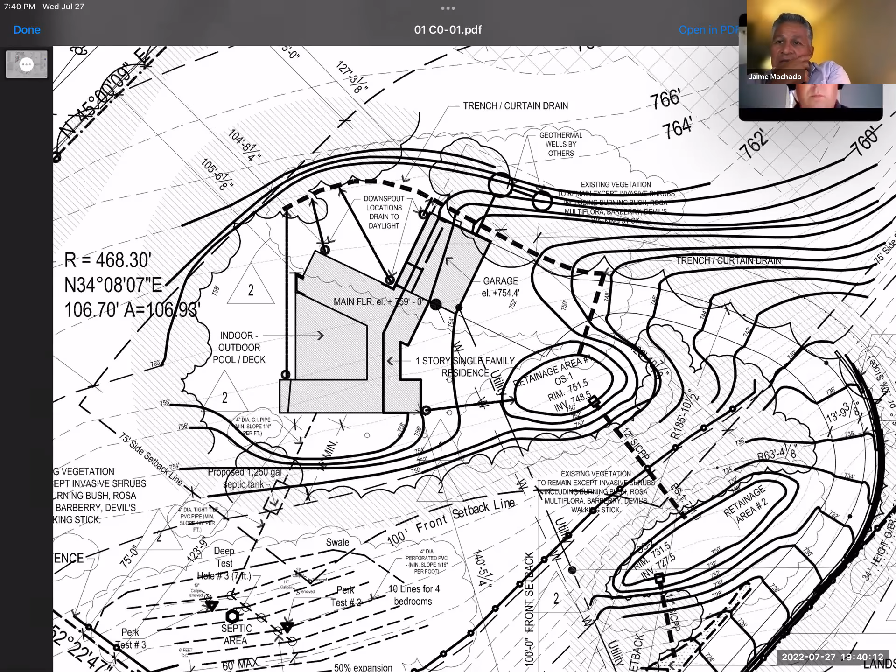As you remember, I had to choose 3 retainage areas, and then we got the engineer involved, and he revised certain things, exactly as you're seeing right now. Starting from the top, he indicated where the rain gutters would drain to daylight.

If you remember the first time, I had a cheese doodle retaining area, connected by a pipe, which was also a trench drain slash curtain drain, which went to a secondary retainage area underneath the driveway. From there, any overflow would go down to the lower area where the driveway would bend.

So looking at that, he revised it and said we'll create the trench drain and wrap it around the northern part of the house. If you notice the little circles on the corners of the building, that's the assumed location for the downspouts of the gutters. Underground, they would run to daylight to the trench, so that would collect everything on the upper part.

On the west side of the northernmost portion of the grass area, which is actually west of the building location, we decided not to do anything. That would naturally just go back into the ground.

So just sticking to the north, it would travel down to the easternmost part, closer to where the garage is. From there, it would take a 90-degree turn and go into what we're calling now retainage area 1. As you notice, there's some information on the elevation for the rim, the intake, and the invert for that area.

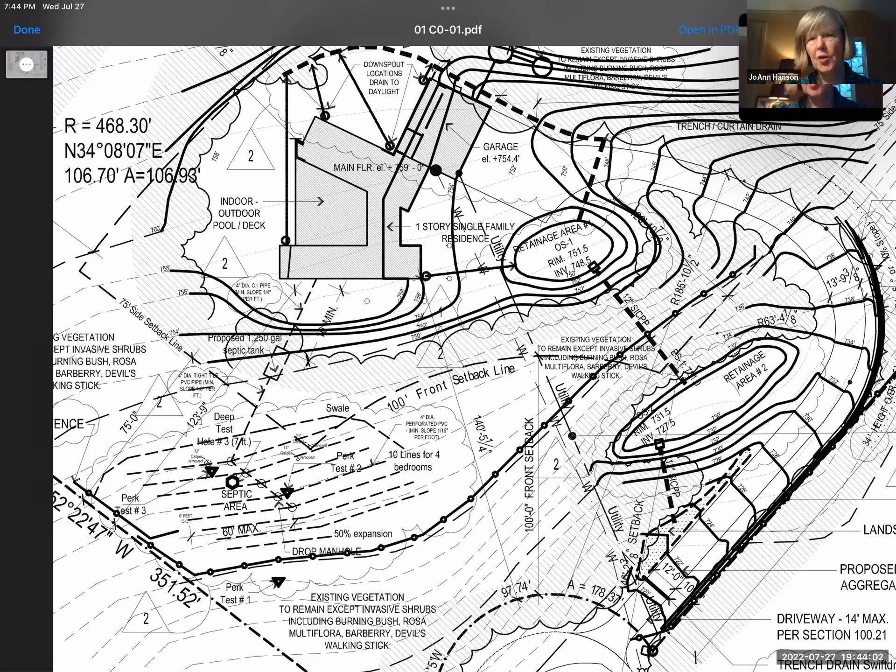So I'm sorry, I'm going to interrupt for a second. So the house is just a 1-story house now, is the intent? Yes, it's always been a 1-story house.

I just didn't coordinate that with the other drawing by the engineer. I guess I was concentrating more on the site design and not reflecting the information throughout all our sheets to make sure that it's consistent.

Wait a minute, I would time out a second if I may, because in our last meeting there was definitely discussion of stairs up to a second floor that was mostly going to be used as a residence for Mr. Perna's son.

Right, so how do stairs and only one story not add up together? Right. It doesn't matter, but let's make sure that whatever we're seeing is representing what you're planning.

That's my fault, actually. I forgot about the upstairs - I thought it was like a 1.5 story, 1 story building with a roof, but I forgot about the upstairs area. So that's my fault, I'll change that back to 2 stories and reflect that.

One of the past comments was to change the 11% grade of the driveway into 10%, which is reflected here.

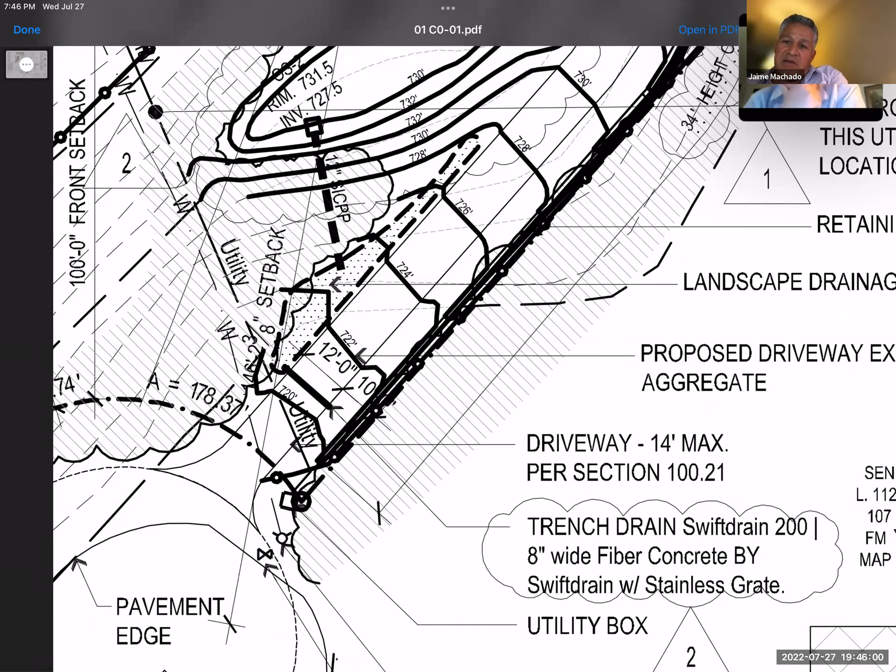Other comments were about what do we do with the beginning of the driveway - as you can see, we have a landscape swale. There were also comments about identifying the trench drain and where it goes. It's just connected directly to that landscape drainage swale, and also a request for detail and information, which is shown in the bubble here.

And also to summarize, we added some information. Could you pop back to that detail of the swale, please, for a second, and just pause there for a moment?

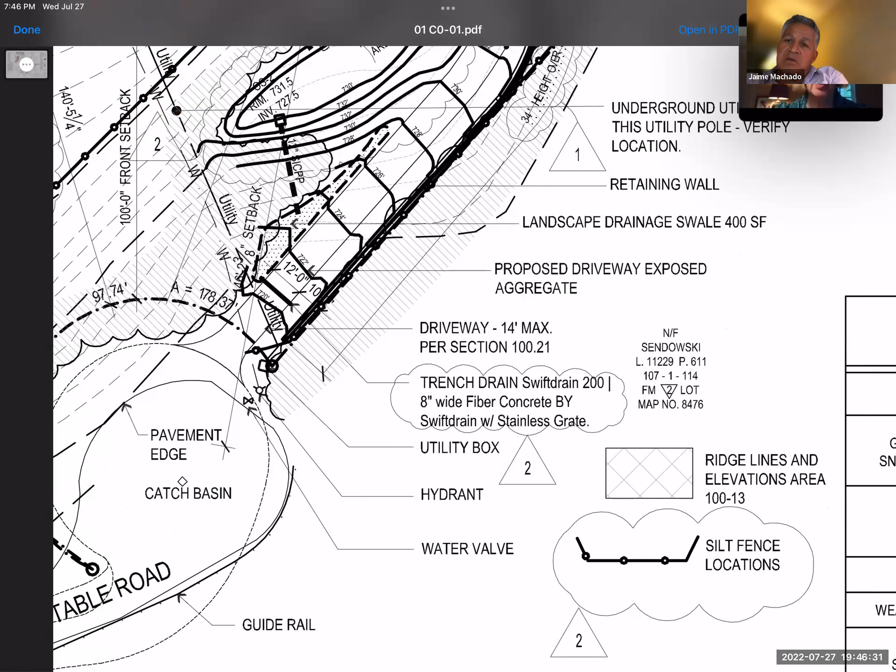So it will be this area right here, which is highlighted in a dark dash area, kind of elliptical. Is it intended to be just a terrain depression that's going to hold water at high density periods, or is there any kind of holding tank involved in it? There is no holding tank.

Most likely, all these retainage areas will not be in use. This is only for an extreme condition, if it rains for 2 weeks straight, which is unlikely. And if anything, the whole site basically has a decent drainage capacity, so it never overflows - it kind of soaks into the ground.

I understand that there's a lot of bedrock here, but there's a difference between having bedrock and cracked bedrock, where water could seep through the cracks underneath the bedrock situation. According to the PERC test, this site does not hold water whatsoever. So the retainage area is better described in the report from the engineer, so we could talk about that if the engineer is on board at the moment.

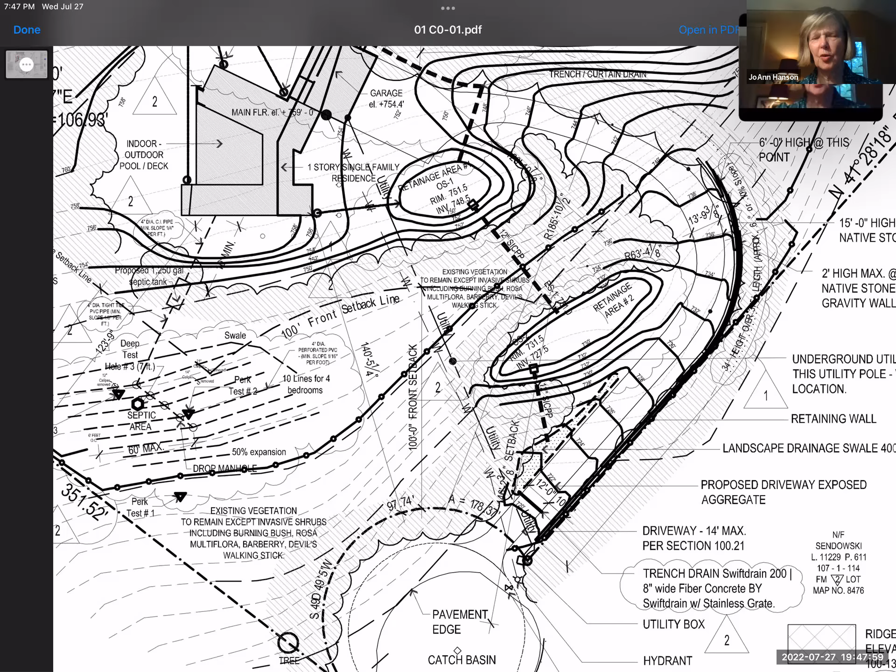And can you just address, because there's a lot of steep slope behind the hill that's coming down into the house - I'm not sure I entirely understood if you were trying to route that water around the house back out to the front to these drainage areas. Okay. I live at the bottom of a hill, so I'm very familiar with how much water can come down those hills.

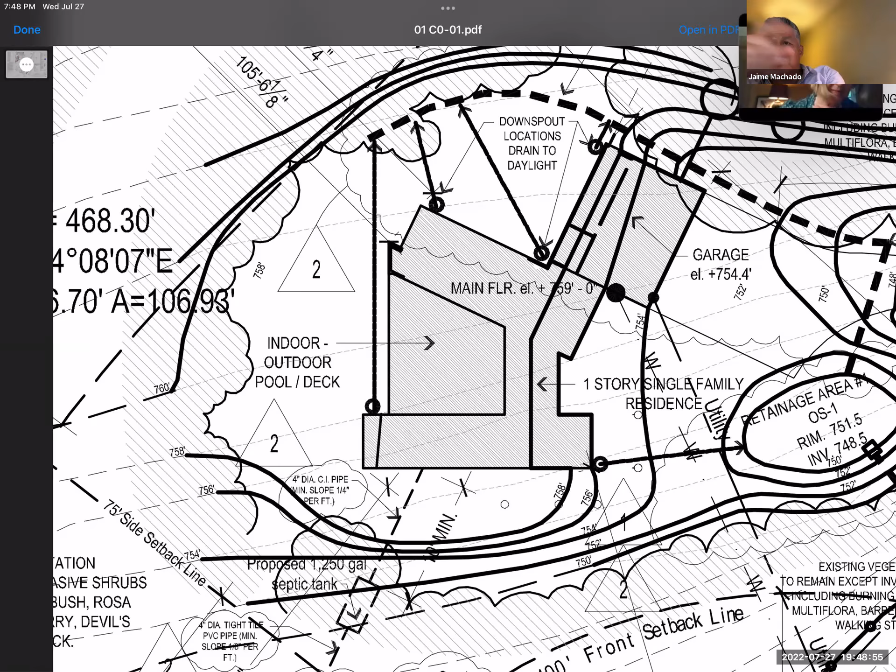If you look at the surrounding area of the building itself, it's at a certain elevation. From that, the surrounding grass area, which is being proposed, will slope away from the house in all directions. So anything coming from above the hill would be caught and directed toward the trench drains, which is the heavier dash area that you see here. This would collect everything and prevent water from even reaching the house.

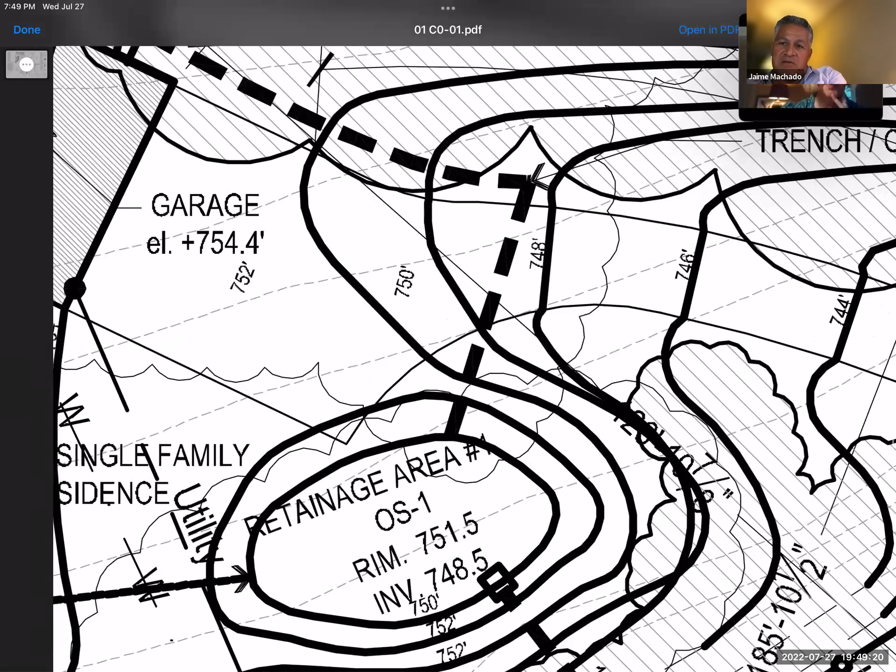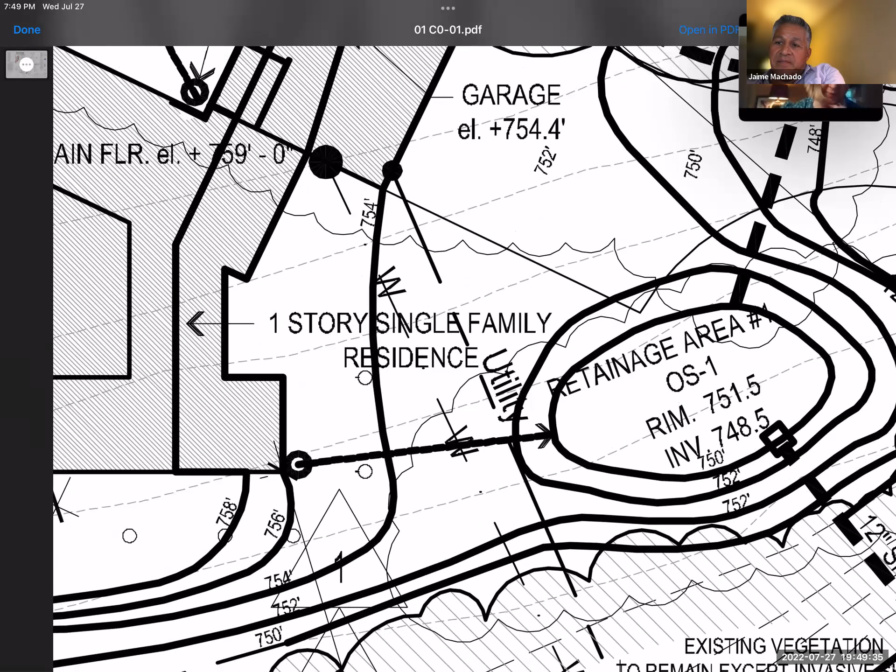From there it would go down toward the driveway, and then where you can see the trench drain indication, it turns 90 degrees and that will go into retainage area 1. On the west side of retainage area 1, all the water would naturally just go toward that area because that's the lowest point. But you can see the elevation of what we're trying to do.

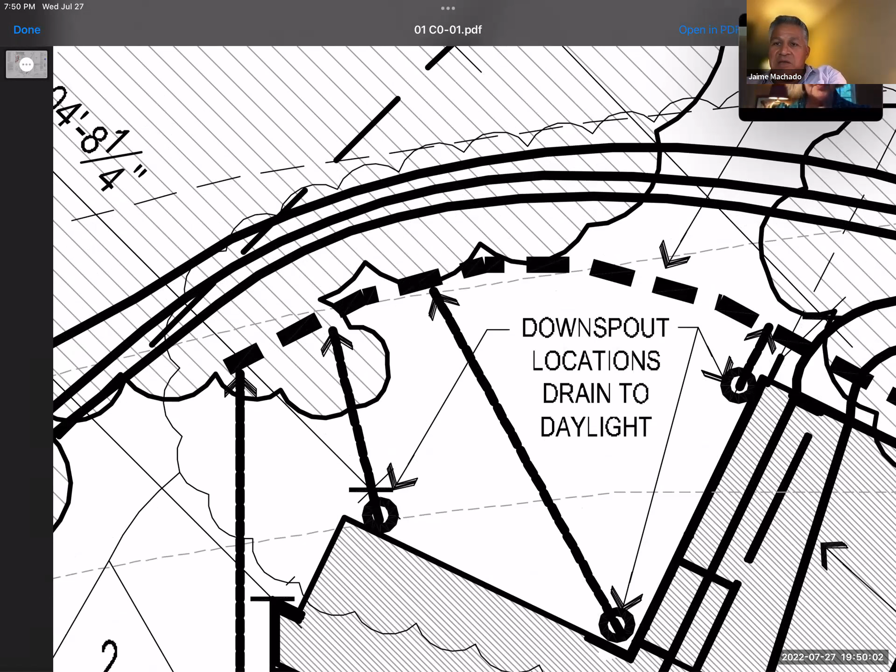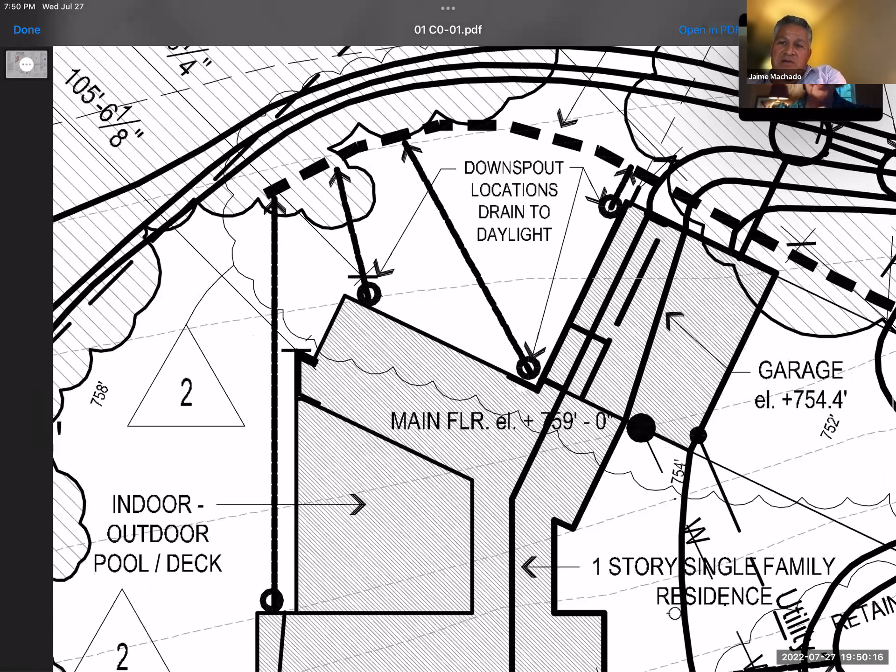So the water would naturally go away from the building toward area 1, which also collects water from a higher location - if you look at this area right here, the water would not go past the dash line from the upper portion of the site. The arrows you see below the dash line show water going toward the trench drain as well, and away from the main building. So this building is never going to see any type of water or ponding at all.

And the depth of that - you're saying trench, not French? The depth of the trench drain is... what?

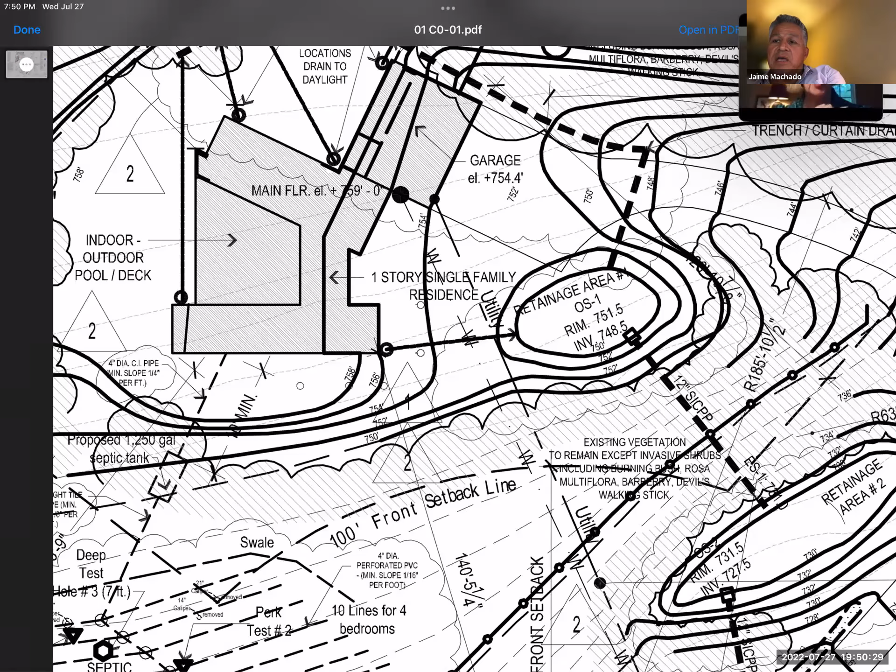I have a detail on A004. Let's see if I could find that. You could bear with me a second.

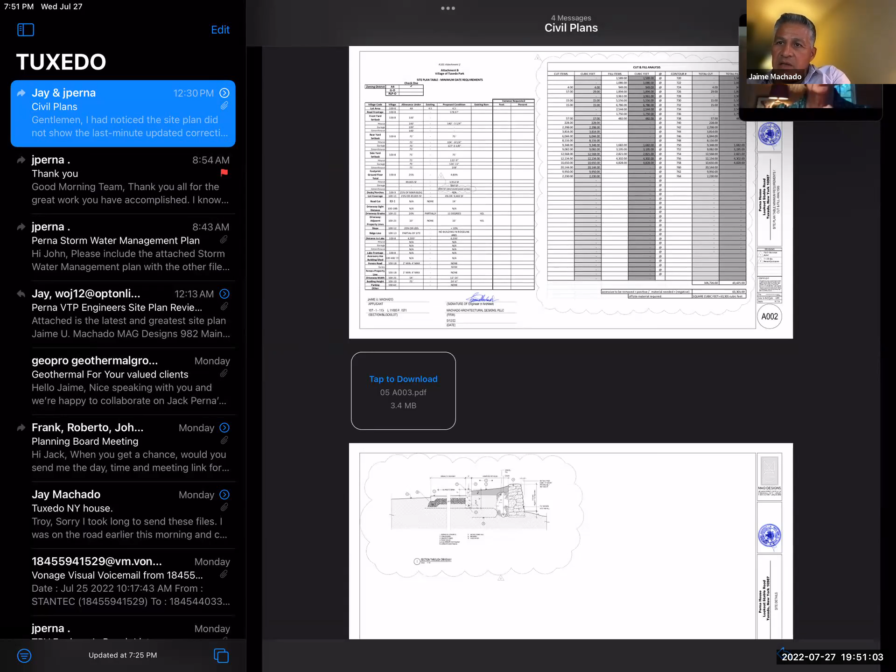Maybe I don't have the detail, but it's typically 2 to 2.5 feet deep, filled with clean stone and probably an 8-inch perforated pipe. We'd probably make it pretty substantial, maybe 1.5 feet wide, with the stone carrying all the way up to the surface, so it can capture surface runoff from the upgradient areas.

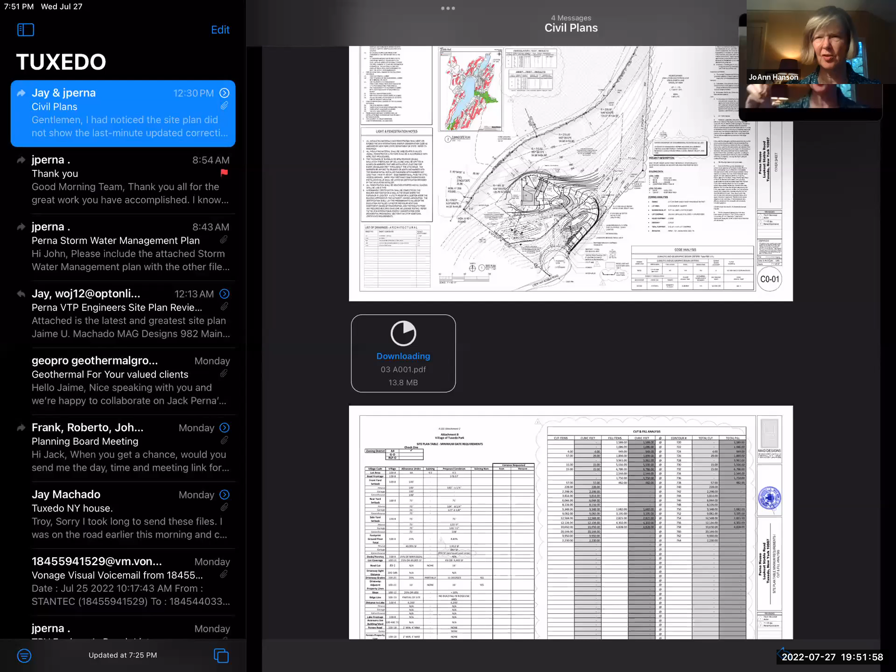Yeah, I mean, we're now, if you saw the cars floating away on Route 4, we're getting really significant rainstorms that create a lot of short-term intensity. Hopefully we won't have long-term storms of the same. So I'd just point that out. Jay could comment on it further, but as I say, I live at the bottom of a hill and I've got a variety of things breaking the flow coming down.

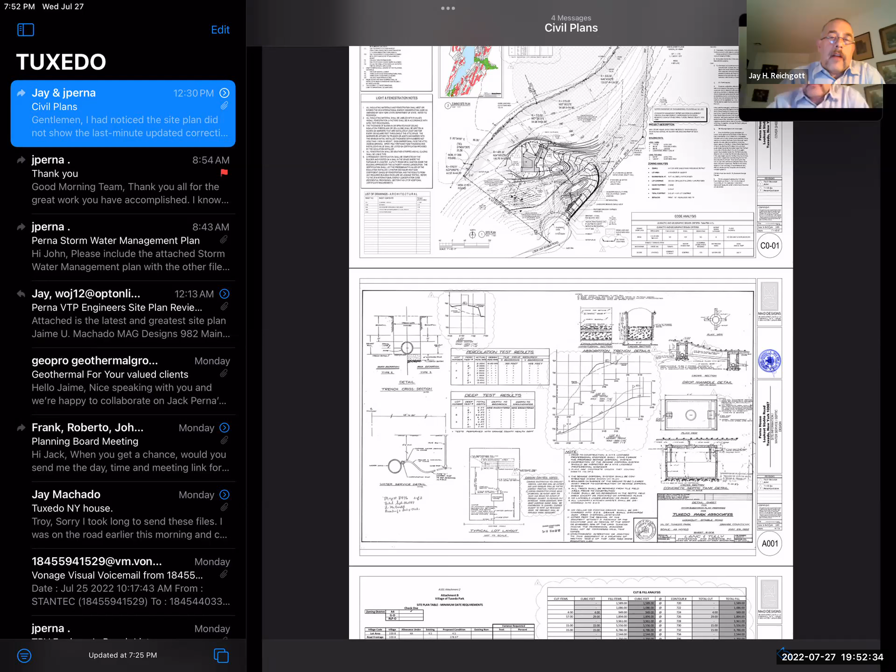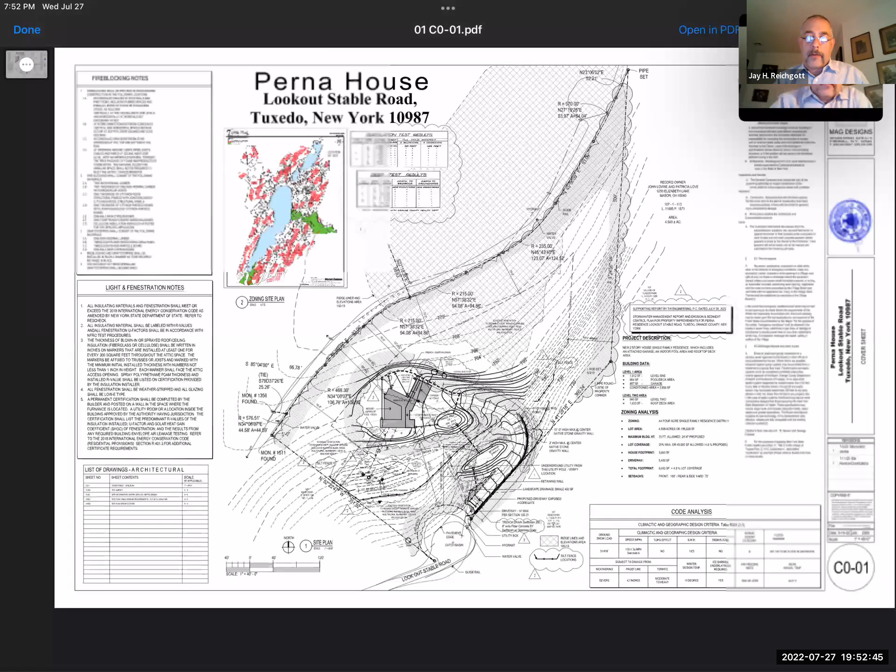Well, I think there were a number of comments raised both at the last meeting and in Joe's initial response to the submitted plans, and it looks like a lot of those have been addressed. Now, I know I got these updated drawings after lunch today, and I got the engineer's report after lunch today. I've looked at it and it's updated drawings and an engineer's report, but I haven't had a chance to review it. I don't know if Joe has.

I think we need to make sure that those comments have properly been addressed, and we can see if the engineer's report properly supports it, and then we'll know. This doesn't have to be based on feelings, we have numbers. I know I'm tossing experience into the mix, but obviously number 8 on the list is we need the stormwater pre and post construction runoff analysis that'll say, okay, this is how this system is intended to work. And I believe that's in the report we received today.

This meeting today, we didn't have all the information as Jay is pointing out, so we're having a preliminary meeting and orientation. We need that, and our engineer needs the time to do the full analysis for our next meeting. No, that's correct, I'm just summarizing the changes. I realize we just uploaded this information. We had some timing issues trying to get people involved to do the calculations, and being the summer, a lot of people are not available, so we got lucky.

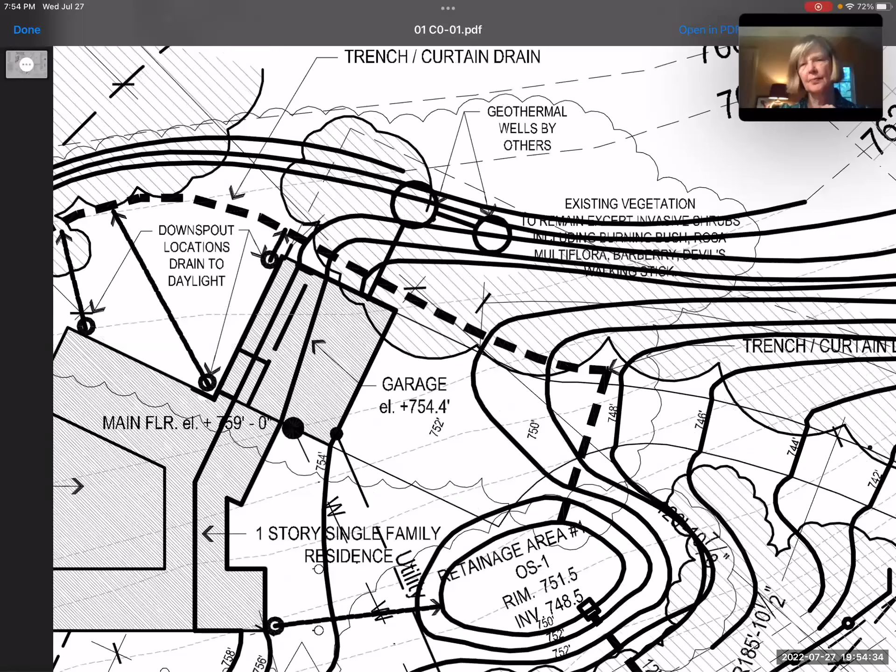As far as the site is concerned, there was a question about the geothermal, that you guys wish to have that on the plan and its location. The gentleman involved with that explained to me how this works, and I don't know if Jack wants to talk about it, but generally what I want to show is the location of it, and this is not defined as of yet. This is just a suggestion of the location, but the common limitation we have is the system has to be about 15 feet away from the building.

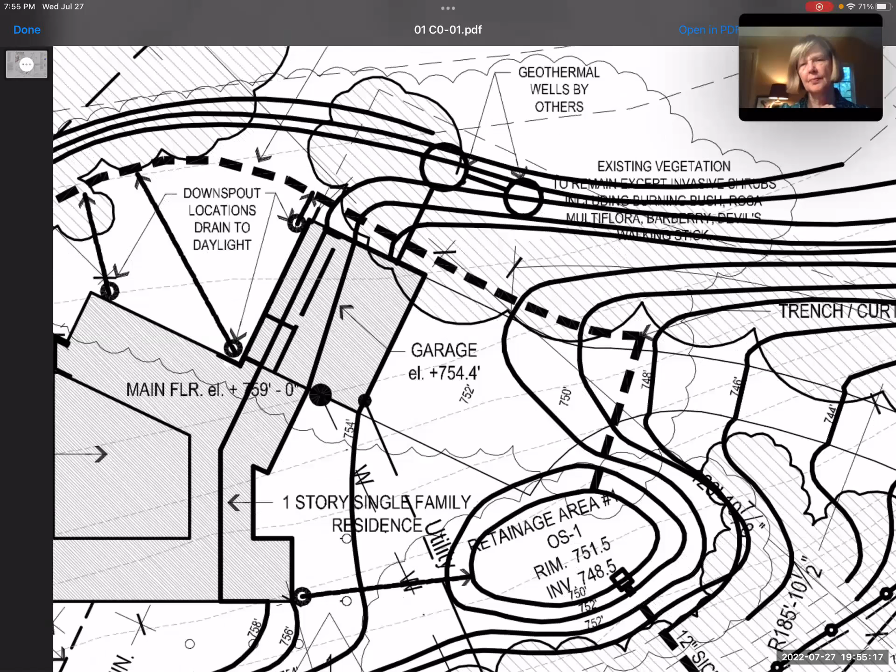And there are 7 wells. Each circle you see, the one to the left, which is slightly larger, has 4 equidistant wells within that circle. It's kind of hard to tell, but they're indicated as dots, you can barely see them. You can see the 4 dots there. And then the circle on the right is slightly smaller with 3 wells. The distance between these 2 circles is about 15 feet.

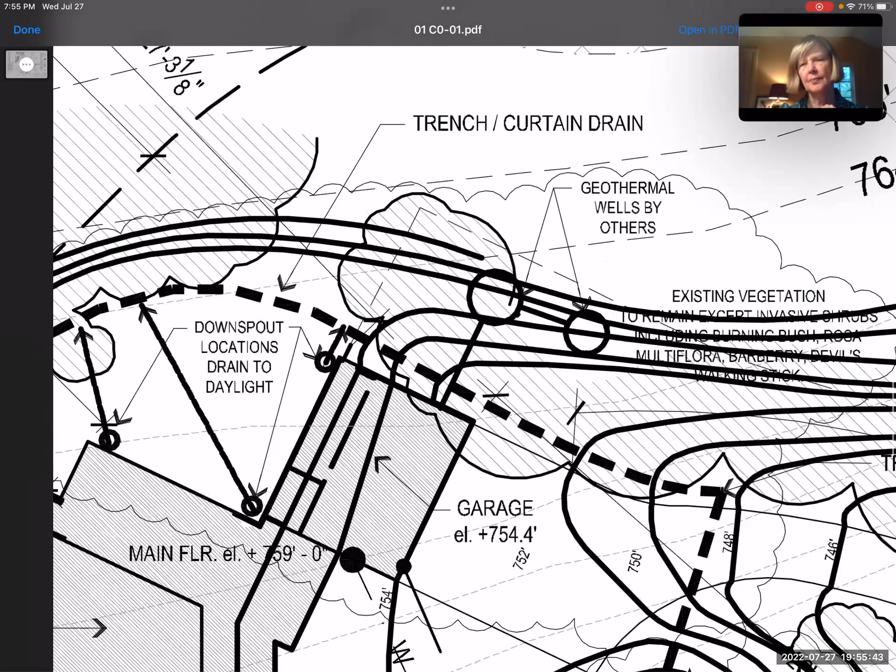So these are the parameters, whether that's going to be the true location, or if it's going to move to the west or more to the east of the building, we don't know. It all depends on what we find at the site. But this is just a suggestion of where this might go.

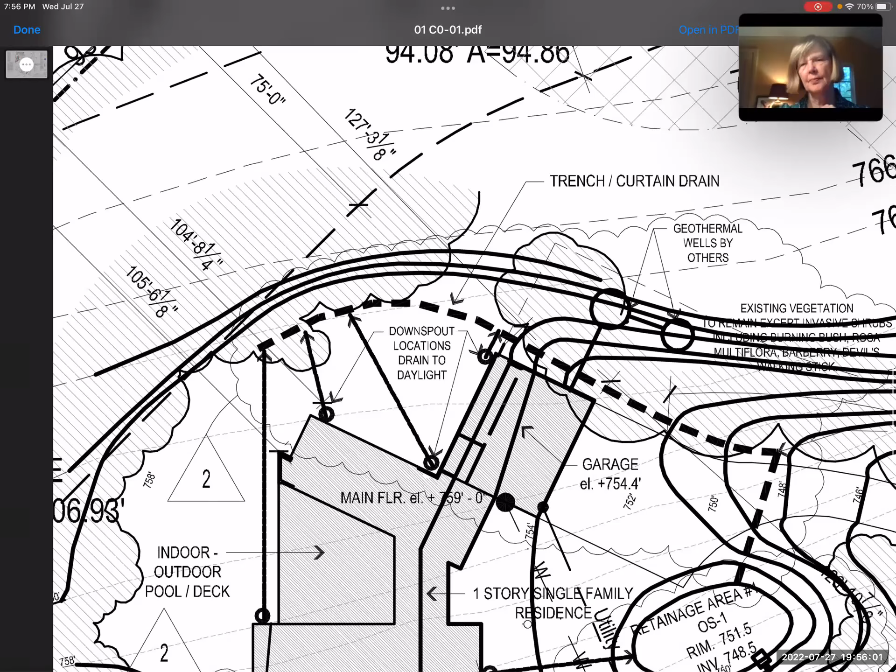Other items, if you guys would ask the question, there's a couple of things we did throughout. Again, I apologize for indicating the 1-story, it did say 2-story, I don't know what came into my mind, I think it was just late and I wasn't thinking. But there is a 2nd-story area for this building, but most of this is a 1-story space. For example, the living room is a 2-story space, so that's where I mistook it as a 1-story when it's truly a 2-story.

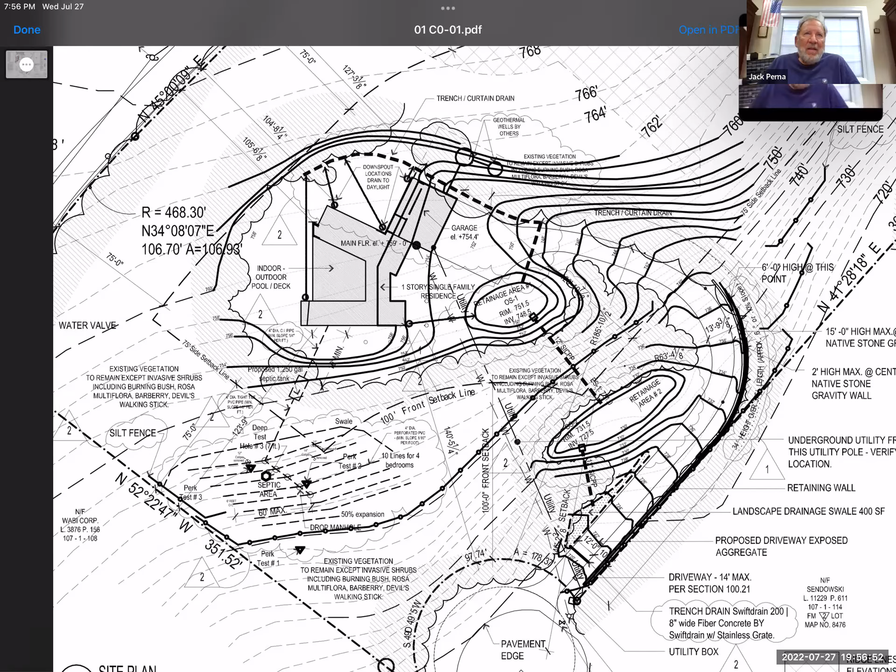But most of the spaces are a 2-story single space. Let me just point out the wing where the bedrooms are, that's a 2-story structure, and the entranceway is 2 stories. Then where the living room, dining room, and kitchen area is, that's 1 story, and the garage is 1 story. So the only structures that are 2 stories are the entryway and the 2nd floor where the bedrooms are, floors, bedrooms 3 and 4.

Conveniently, the purview of this board has more to do with footprint. So long as you're under the maximum height limit, we don't have to send you to variances. I think we're under 70 feet. That would be quite a ceiling to be putting in that second floor. Exactly.

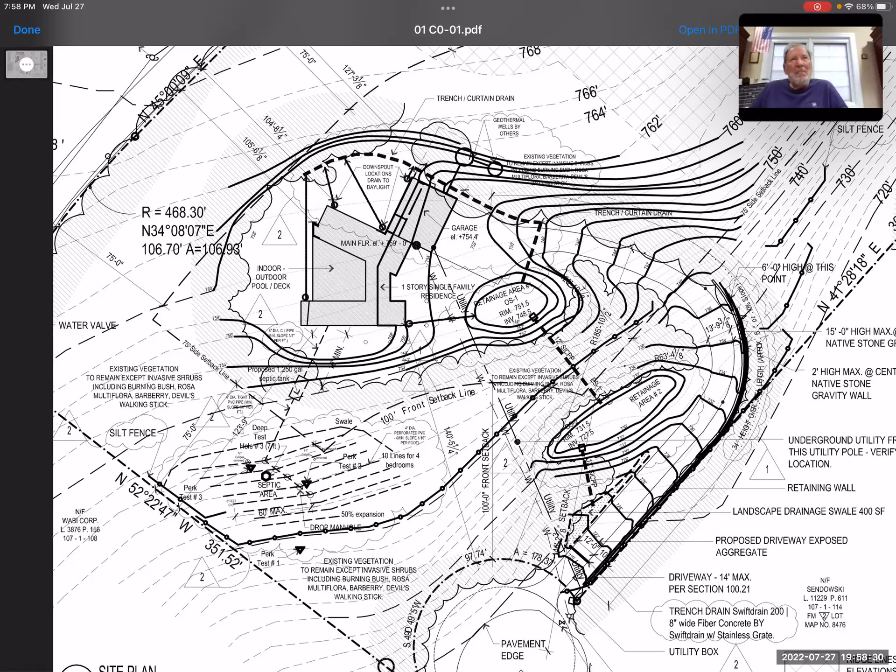Good evening, this is John. I have just two points of concern. We need to have a little dialogue with the planning board. We need to establish the maximum buildable envelope, Mr. Perna. That envelope typically is designated clearly on the site plan, just outside the area that you wish to build on, and should be noted in your legend as the maximum buildable envelope. We still don't have that. I understand there was some miscommunication early on. You thought the maximum buildable envelope was actually the building area, but the buildable envelope is really just beyond the intended area where you wish to build the house. So that's something that needs to be put on the plans. I don't know if the planning board members have any questions regarding that.

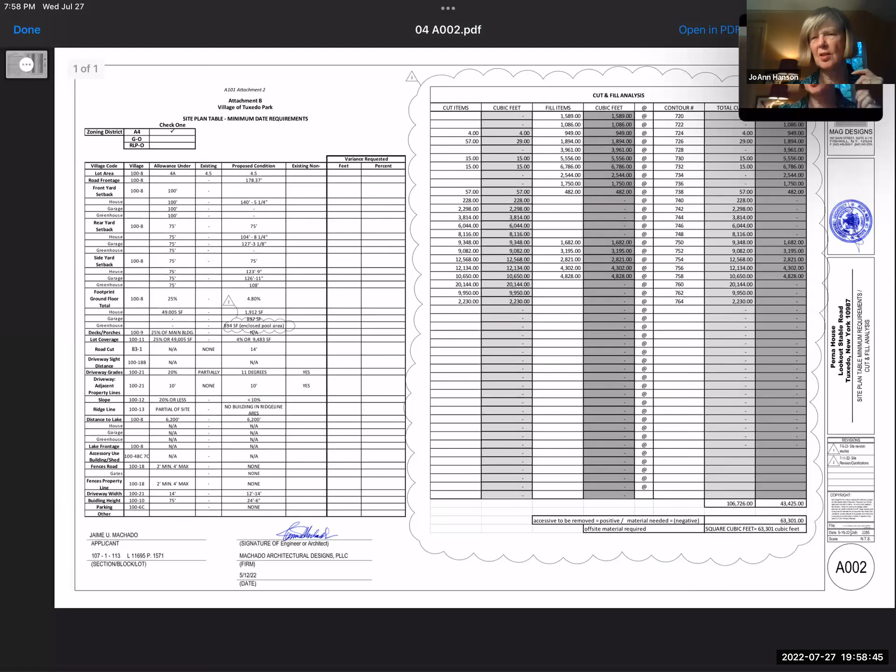No, and it obviously includes the areas of disturbance, so it's the septic system and the final location of where the geothermal is going to go. I don't know where you are on the timing of doing that analytical work with the provider.

The other question I had, Mr. Perna, is I know utility systems are being made smaller and smaller, but absent any basement, where are the utilities going for the geothermal wells, the pumps, et cetera?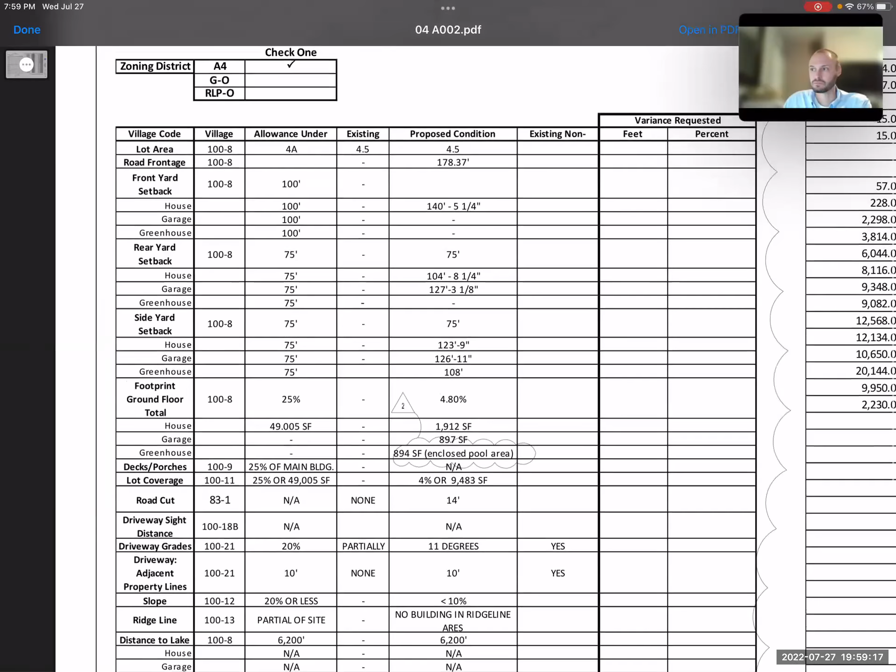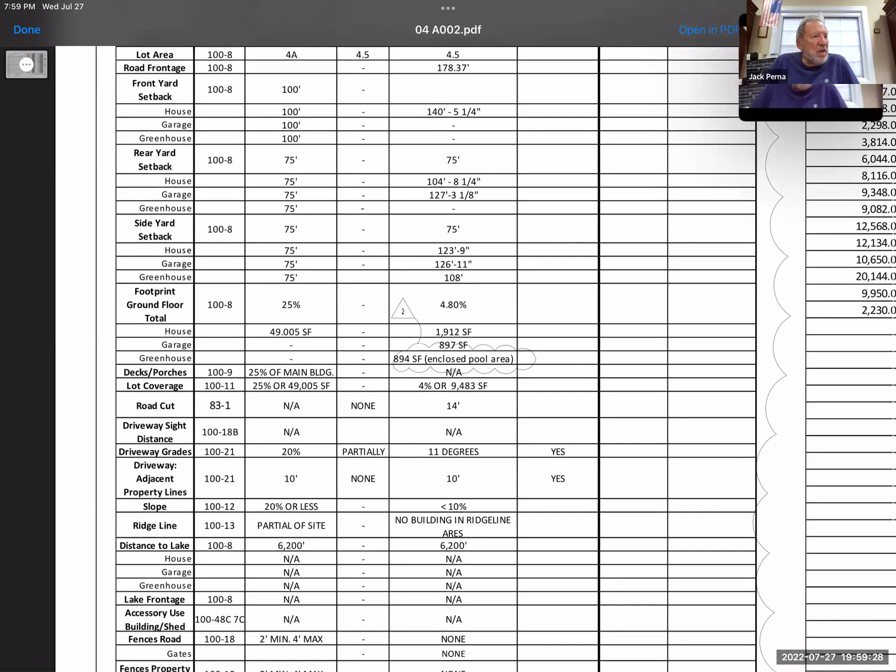The unit itself, the Hydron module that will be providing all the heating and air conditioning for the building, is about the size of a desk, maybe about 5 feet high. That will be located in the utility room in the rear of the garage, in a separate area from the garage. It'll be walled off, with a door into that utility area, and a door going outside of the garage. So it'll be housed in there, but it's a single unit. It'll create hot water, heat the swimming pool, create the air conditioning for the summer, create the heat for the radiant floor. That's basically what it does.

Okay, along that line with utilities, I think we should note, are there any propane tanks or anything necessary? No, there's not going to be anything burned in this house. No fossil fuels whatsoever. Everything is going to be solar power backed up with batteries, with no generator backing it up. Batteries will back it up. And there'll be no outside fire pits or anything like that whatsoever.

Once again, along with the utilities, at some point you need to make a decision whether you're going to tap into the water main at the cul-de-sac or tap into the water main up at the end of Lookout Stable Road. That's up to you. Well, at this point, I'm considering going up to the Lookout Stable Road. Correct, water tends to like to flow downhill, doesn't like to flow uphill, so taking it from the top and bringing it down to the house will ensure proper water pressure. So that's basically the plan. Plus the distance will be closer to the house. This is Tuxedo Park — it will help ensure proper water pressure.

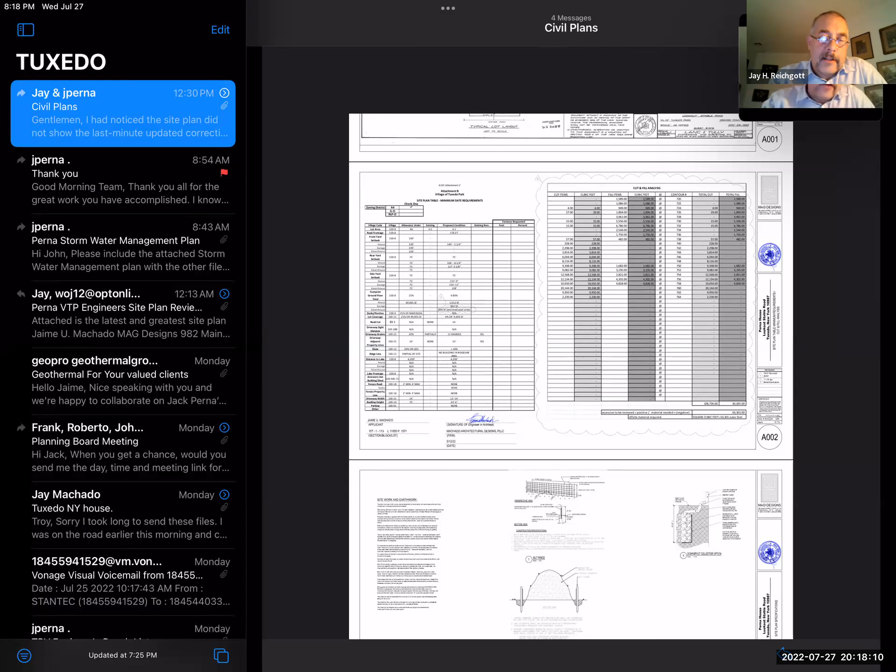If you've got excess, that is to say more fill than you need, you've got to pay somebody to haul it away, because dirt's magic stuff. If you have too much, you got to pay to get rid of it. And if you don't have enough, you need to pay to get it brought to your site.

But if you're importing fill, you now need a fill import permit, and that's town board, village board, if I remember correctly, has to approve that. Which is not necessarily hard to do, but not something you want to do when you're looking at the hole and you need to fill it.

So this is not a minor question. This is not the first house that I built. Understood. And the last house, I had...

310 loads of deleterious fill to remove. It cost me $100,000 to get rid of it.

Yes, it's one of the reasons why I love the lot that I have in Tuxedo Park, because nobody's disturbed it, nobody's dumped 310 truckloads of dirt there, deleterious fill.

When I had to get rid of that material, I had to get it all tested before anybody would take it. Right, so that's one thing.

The other thing is, we don't know what we're going to wind up with when we start this excavation. If you've ever broken rock, every time you break a rock, it gets four times the volume that it was when it was in one piece.

So if we wind up having to break quite a bit of rock, we're going to wind up with a lot of broken rock, and that'll increase the volume. So it's really not going to be able—no one, I don't think, I mean you could make some kind of ballpark calculation, but no one's going to be able to tell exactly what we're going to wind up with, whether it's going to be positive or negative.

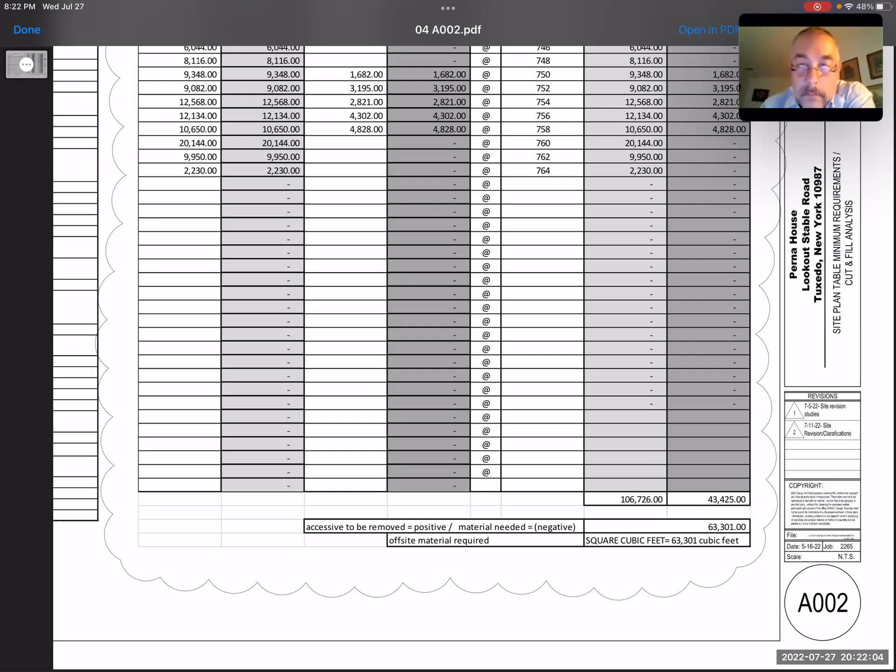Jamie, just a quick question on that sheet you're showing, because I don't believe I have that one. I wanted to see if that was part of the more recent submission—I'm looking at one from 7/11 that has a different excess noted. I don't know if I missed that one. Yeah, I don't have that one either.

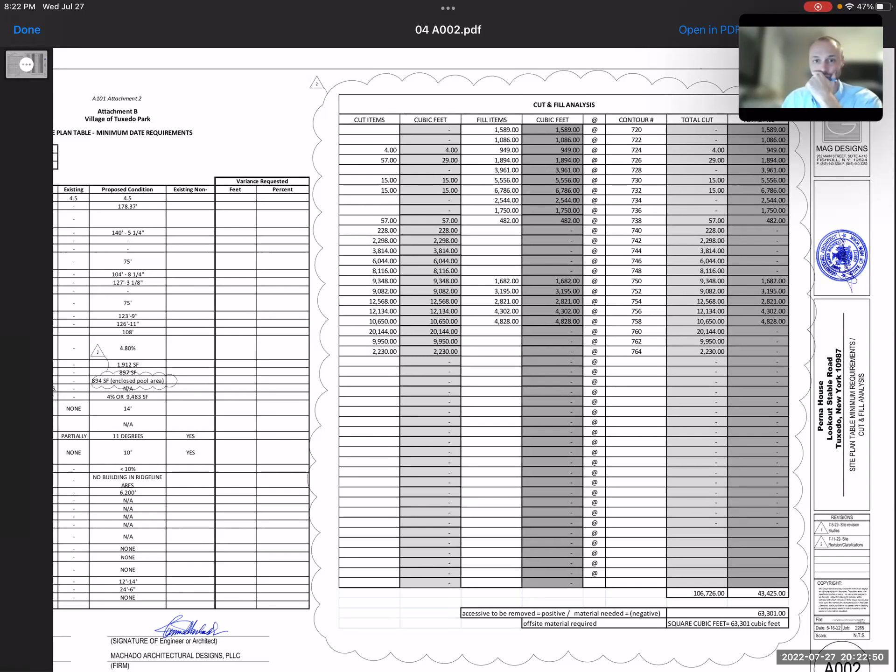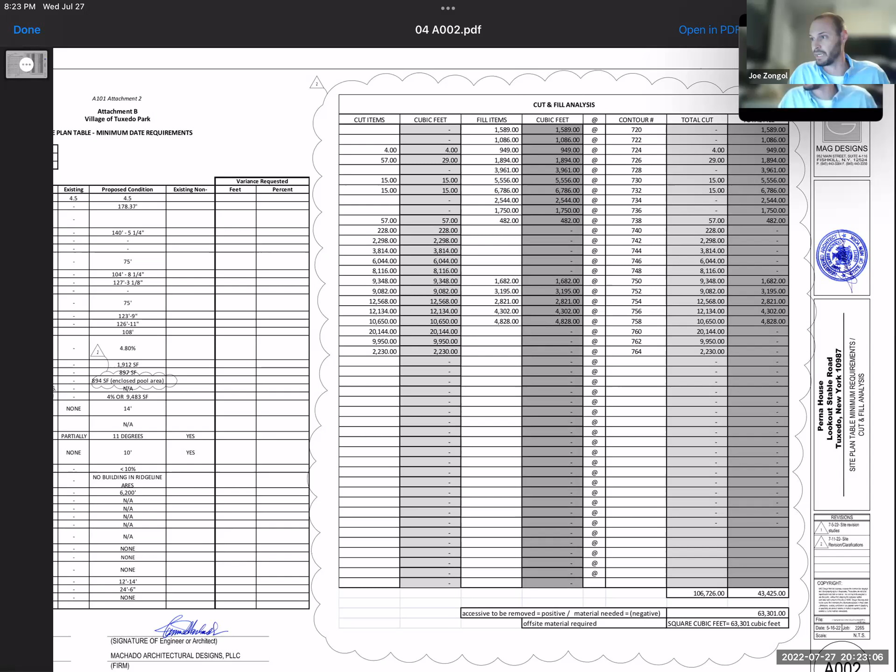What was the question, did you want me to go over it? Did you submit the sheet you have up right now to the village? Yes, actually we submitted it this morning because I noticed one of the emails did not have that. Okay, maybe I didn't see that one then. Yeah, I didn't receive that sheet either. I asked that after this meeting the entire package be resubmitted, because I noticed the plan we're looking at, the A002, had at least one difference between the sheet I have on my screen and what I received this afternoon. So I want to make sure we're all working from the same set of drawings.

To answer the Chairwoman's question, cut and fill calculations should include all site disturbance. There are factors that can be used to calculate rock, but whether it's excavation for the stormwater retention ponds, the driveway, or the foundation footings, it's total site disturbance—it doesn't matter what the purpose is for. The village wants it so they can determine whether there will be imported fill, exported fill, or hopefully in this case, an even balance.

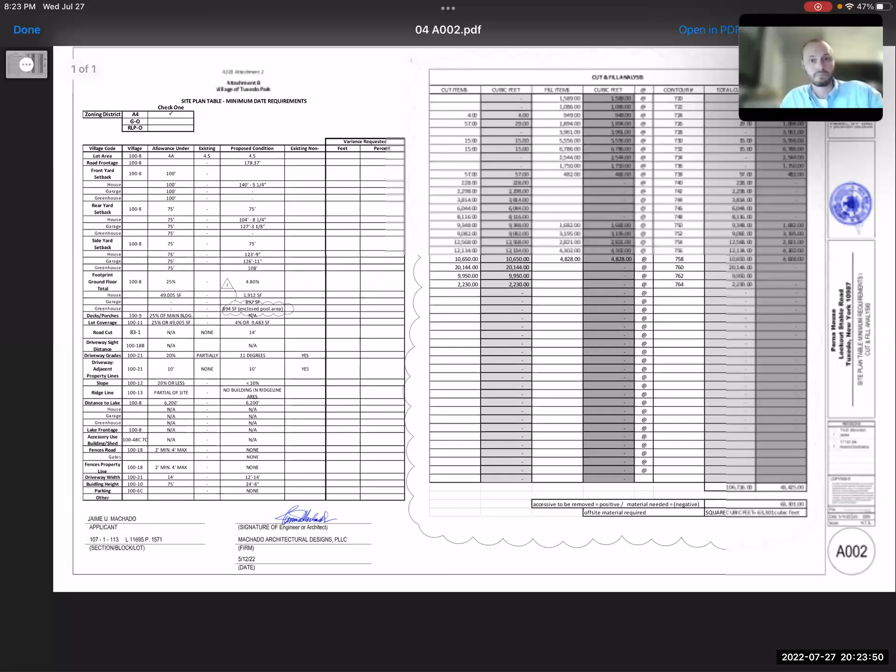Okay, and I have that sheet up. I did have one more comment. If you were talking about the bulk table earlier, I know Jay had pointed out the issue with the driveway grade. I think if you could just go over those requirements again, because I think some of them are not showing what's actually required—it's showing what you're proposing. I think in some instances you might be referring to the wrong section, so please make sure what's shown corresponds to the correct section, and coordinate with the building inspector to make sure they're accurate.

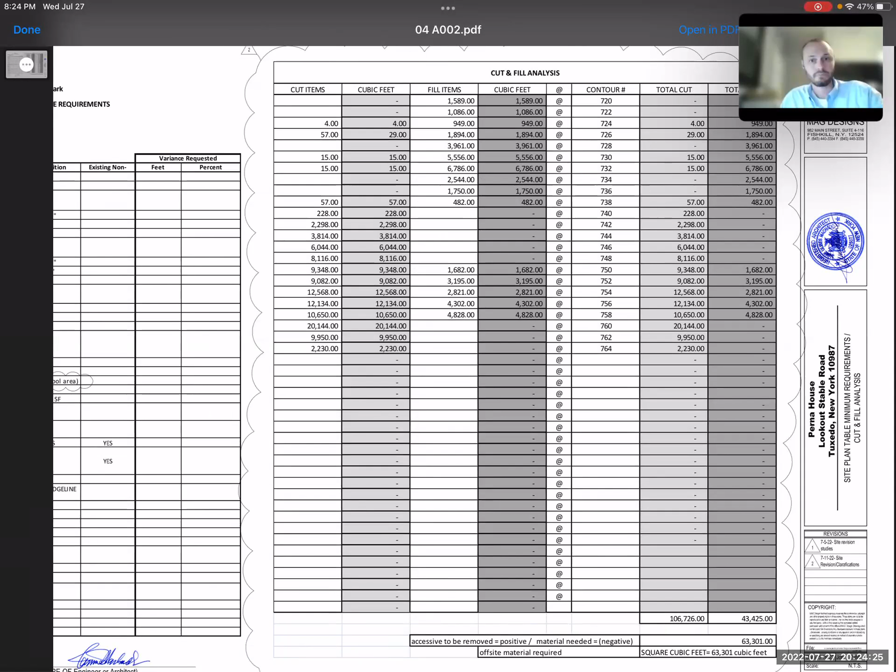Is this for the driveway? For a few things—I think the footprint, ground floor total, you're listing as a percentage, but I believe that should be square footage. The driveway grade, what you're saying is required under the code section you cite isn't the actual requirement. Distance to the lake, the requirement is 100 feet minimum, but you're saying the requirement's 6,200. The fence property line minimum distance is 2 feet, fence road minimum distance is 5 feet. So what you're listing in the table as a requirement isn't the correct dimension, I believe. Please make a note to check those and coordinate with the building inspector to confirm you're referring to the correct dimension.

Maybe that information could be sent to me, because this is what I was using, which was originally sent to me in a package—I don't know if it's obsolete or if there's more updated information. I didn't make up this chart.

So the actual dimensions under the allowance, in that third column—were those from the chart, or was that something you put in there? Yes, that's...

No, that's what I got from, I can't remember where, but I didn't make up the information. But it even says the driveway grade is 20% allowance, under 20%. And that's not correct, is it? Doesn't it have to be under 10%? Correct. Yep. And then, like Jay mentioned earlier, you have 11 degrees, which is incorrect.

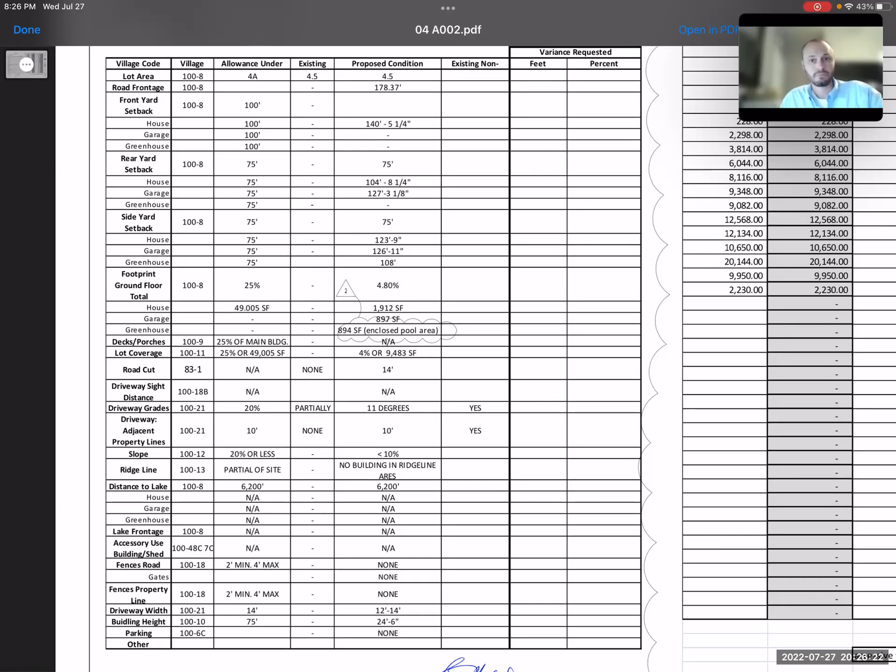Yeah, you become blind to these drawings when you look at it too much. But the 20% is not correct for the allowance.

That's on your site or code. I think, unless you give me updated information, this is what they're stating, and it just makes me look better, because once I change the 11 degrees, it's going to say 10%. So we're doing half of what's required.

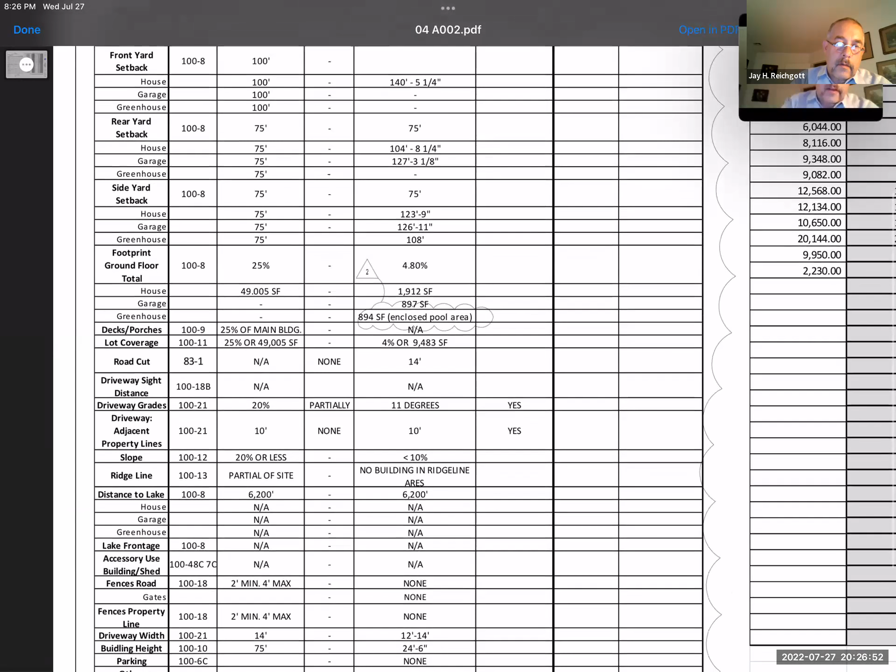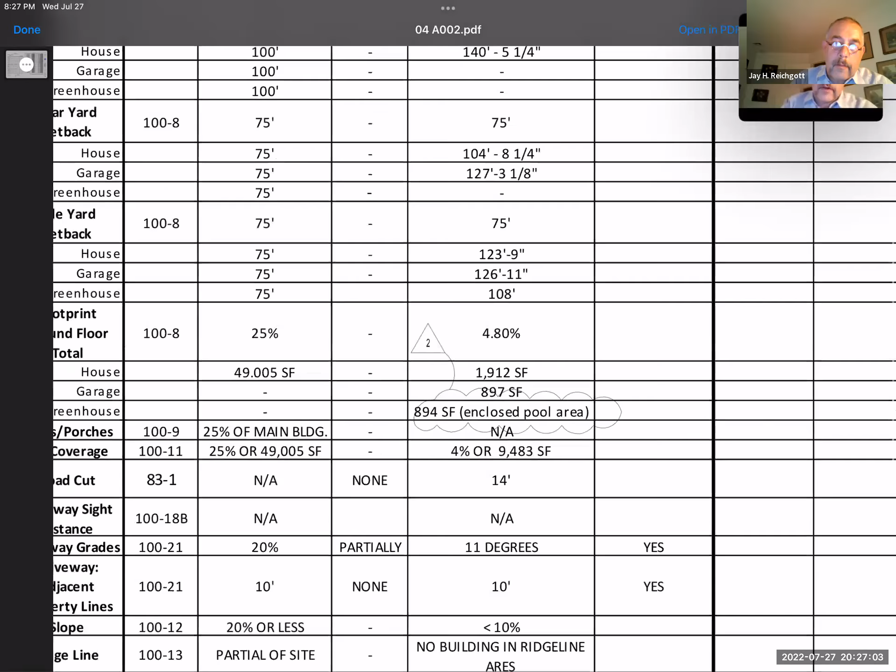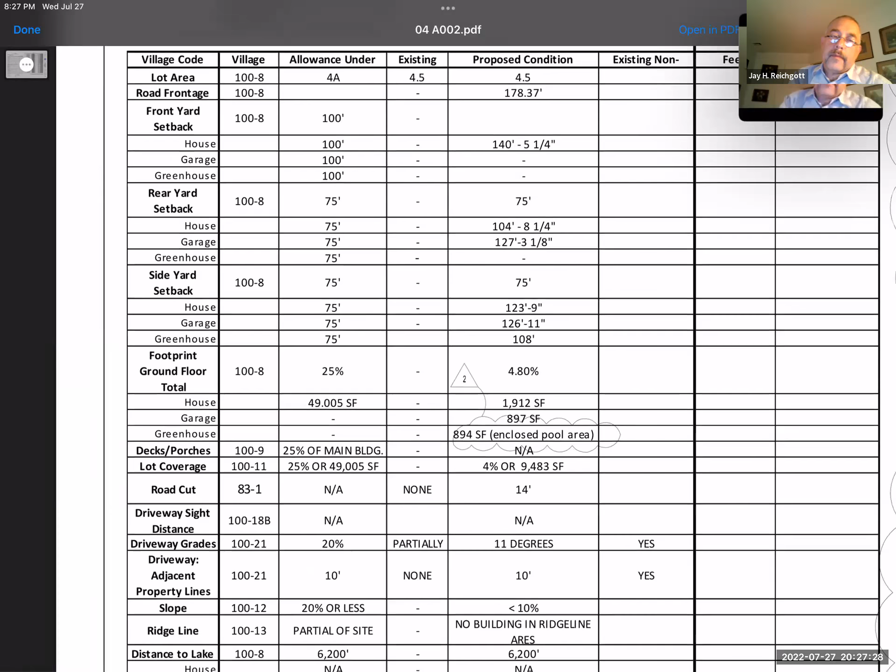If it's not required, then okay, but wait a second, I'm not sure where I got that. But be careful, degrees of slope and percent of slope are not the same thing by a significant amount. So what I'm saying is, I'm not sure. I did this a while ago, but the allowance column is basically information I either found or was given already to us. So proposed condition makes me look better because I'm doing half of what's required. So if it is truly 10%, then that's fine. It's just, I'm not sure. I didn't make that up, in other words.

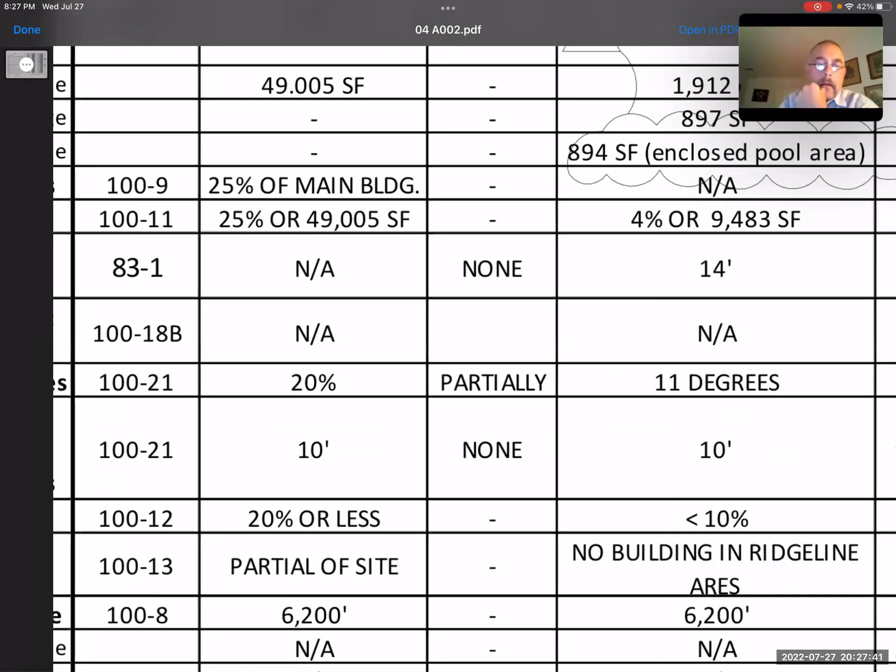Okay, so perhaps, I don't know, I'm not trying to assign homework, John, but maybe you, and I'll be happy to help you, we should edit our half of this table to make sure the right numbers are there. Okay, I'm good with that.

You're absolutely right. And I think the section under slope 100-12 is that 75-20 rule. So somehow the 20% got in there, but it's not really correct. But I can go over that tomorrow and make some edits.

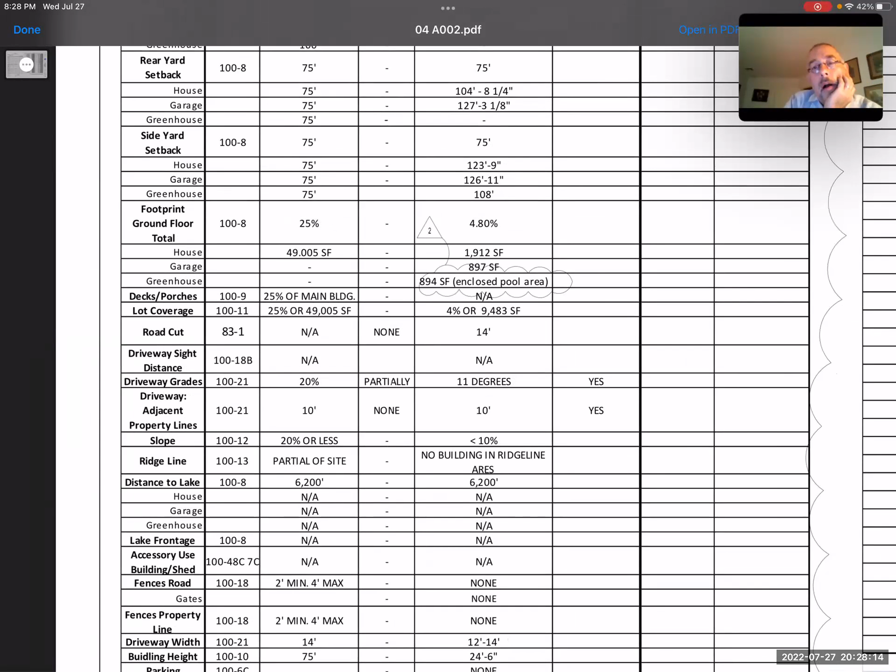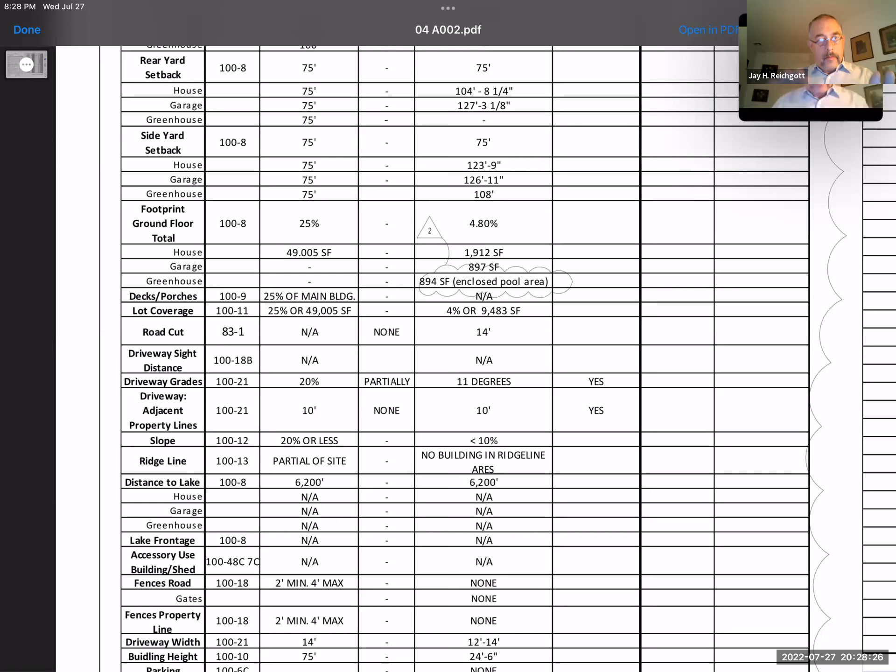I think that somehow, somewhere this table, the requirement section has gotten a little corrupted. I'm not saying this is an applicant's error necessarily. It's just, let's just get it corrected, and then it doesn't matter.

I believe I have this on Excel. If you want, I can send that to you. Well, guys, I sent you the form in Excel so you could input the numbers. And I just think some of the numbers you wrote in under the allowance, you may have either oversimplified them or have them in the wrong place. It doesn't really matter how it got corrupted, let's just clean it up and then we'll go there.

And if there's any additional items that have to be on there, by all means, let me know.

And I think, John, this is a little out of purview of the board, but maybe what we should do with the driveway grade, since this isn't the first time this question has come up, is note it's 10%, which is equal to a certain number of degrees, because I can't do that calculation in my head. And then it doesn't matter, we've got it both ways. I indicated 6 degrees, I hope that's correct. So 10% or 6 degrees. I don't know, actually, we'll check and then we'll know.

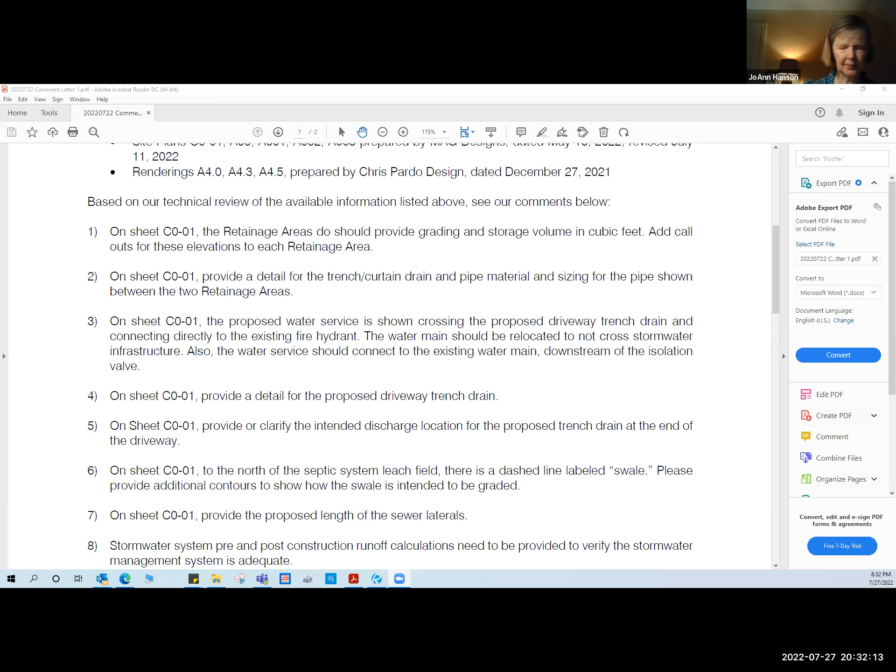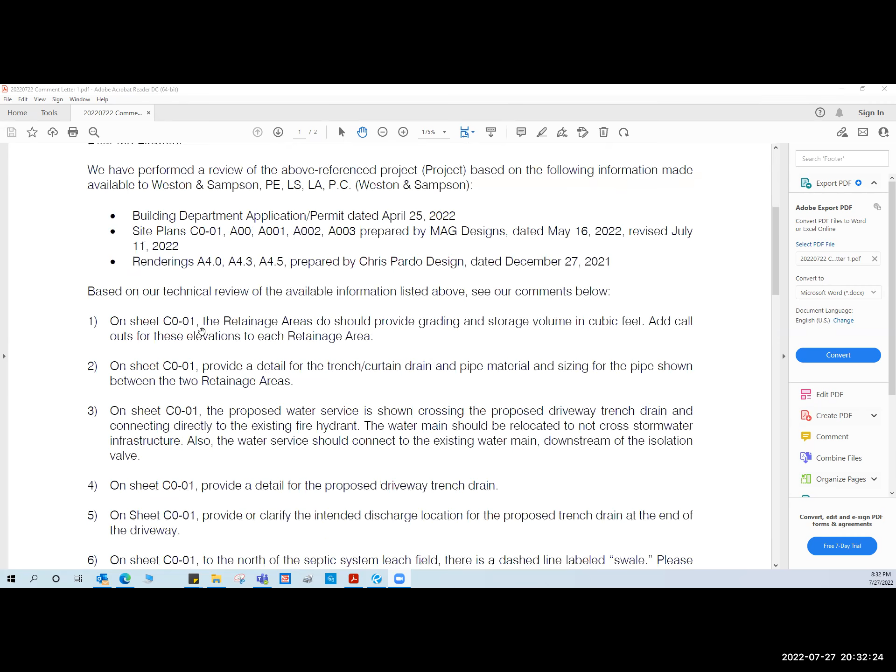First comment, retainage areas, there's a typo there, should provide grading and storage volume in cubic feet. Callouts for the elevations should be provided for the retainage areas.

It looks like the revised plans include some grading, and I'll have to review the stormwater report in detail just to make sure the volumes are shown. Originally it was just shown in planimetric square foot area, so we weren't able to determine the volume of the stormwater retention areas. Provide detail for the trench/curtain drain and pipe material and sizing for the pipe shown between the two Retainage Areas.

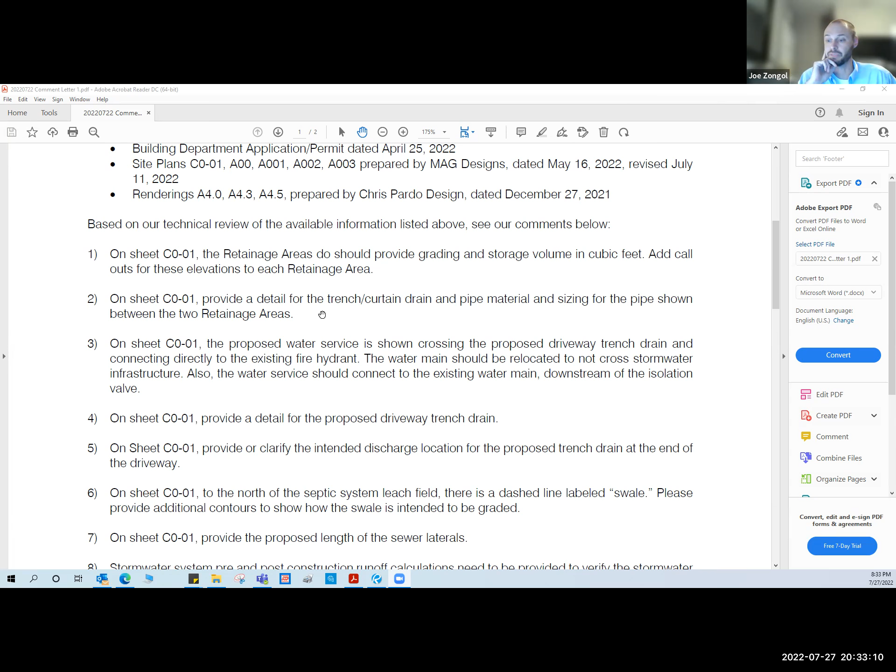It looks like that pipe diameter and material has not been specified. We'd like to see what the pipe diameter and material is going to be for the trench drain that is shown behind the house and crossing the driveway.

The proposed water service is shown crossing the proposed driveway trench drain and connecting directly to the existing fire hydrant. The water main should be relocated to not cross stormwater infrastructure. Looks like the trench drain has been moved. Also, the water service should connect to the existing main downstream of the isolation valve.

Looks like that has not been addressed at this point. Connect the water service directly to the hydrant, there's a valve that's shown. So at the end connected to each hydrant, typically there's a water shutoff, so if the village had to do maintenance to that hydrant, you're able to turn the water off and replace the hydrant.

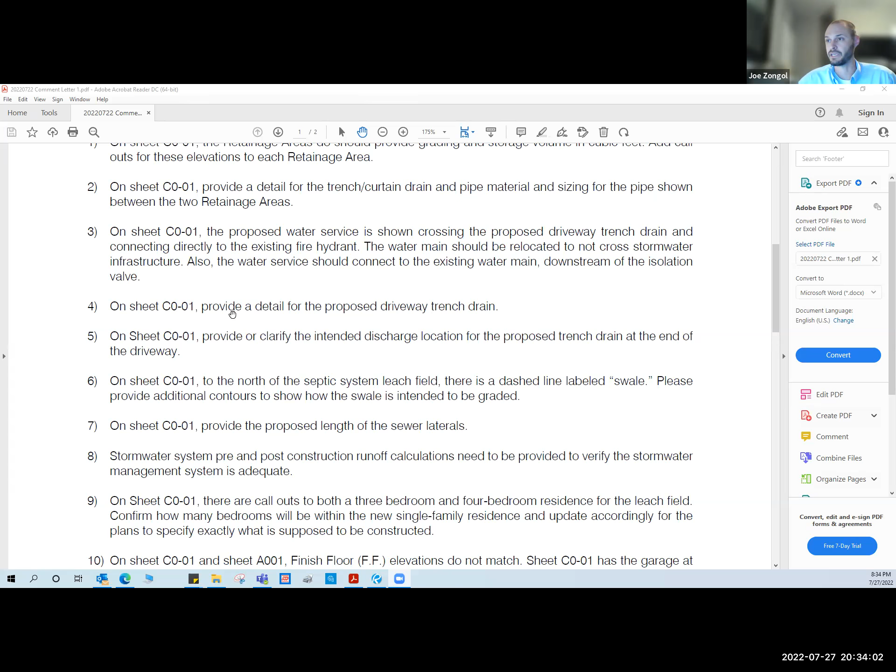So you don't want to be connected between that valve and the hydrant, otherwise the house would be out of water. Provided detail for the proposed driveway trench drain, there's a callout on the proposed plans for the specific make and model. Please clarify the intended discharge location of the proposed trench drain at the end of the driveway, which I didn't see on the updated plan.

It looks like that swale on the uphill side, the northern side, is connected to it, but the trench drain would be lower gradient, so I believe it would discharge to the southern part of the site. We'd like to see where that water is going to be discharged to, because it's going to be collecting sheet flow from the driveway.

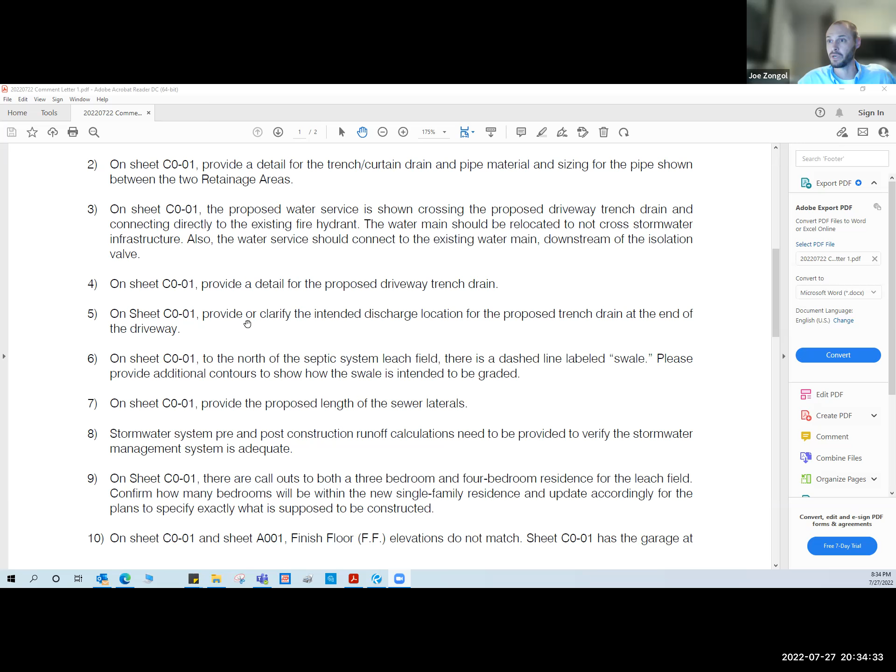Really, the primary intent of the stormwater system, as I spoke to the stormwater engineers, we want to demonstrate that the pre and post peak runoff flow rates are going to be the same or less, so the post construction stormwater discharge rates need to be the same or less than existing conditions. When you add hardscape, when you add piping for water, that'll increase the velocity of the flow. So we want to see where this is being discharged and how that's being handled to slow it up.

To the north of the septic leach field is a dashed line labeled swale. We need additional details or contour lines to show how that swale is intended to be graded into the site. It doesn't provide a width, a depth, or anything like that, and I'm not sure how the contractor would know how to build it, or how the village would be able to know it was being constructed properly.

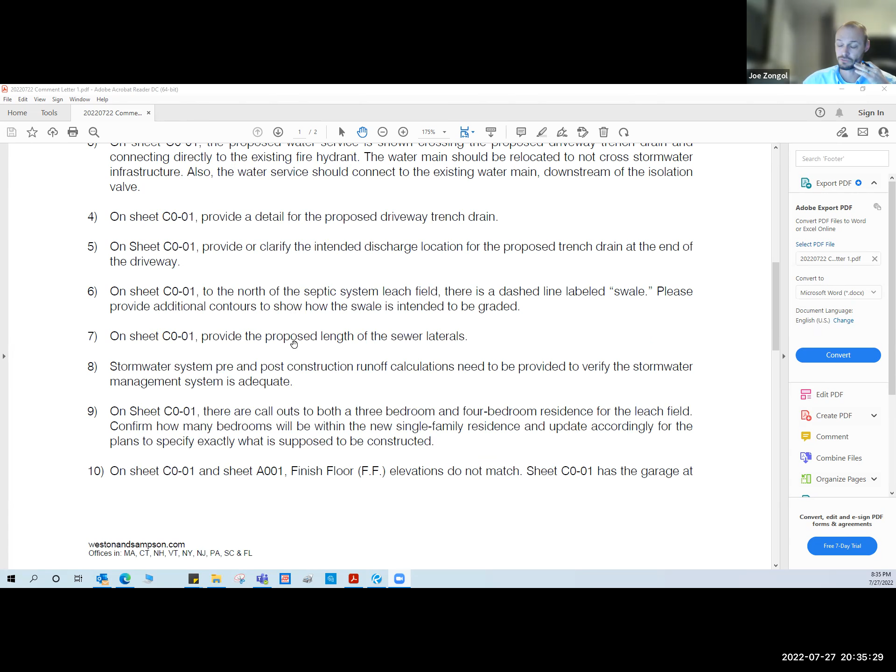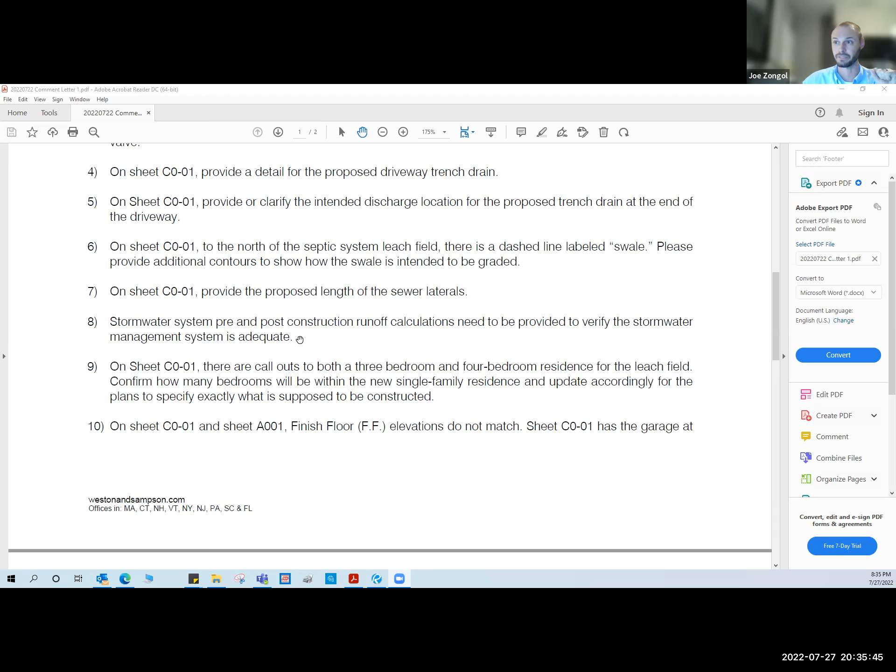Provide a proposed length of the sewer laterals for the septic system. It says maximum 60 feet, but we'd like to know exactly what the design length should be, so the contractor can build it properly. A lot of these, if they're asking for additional detail, it's not only for the contractor to build, but it's for the village to be able to confirm this is being constructed according to plan.

We discussed the pre and post stormwater construction runoff calculations. That was submitted today, so we'll have to review that in some more detail in the coming days.

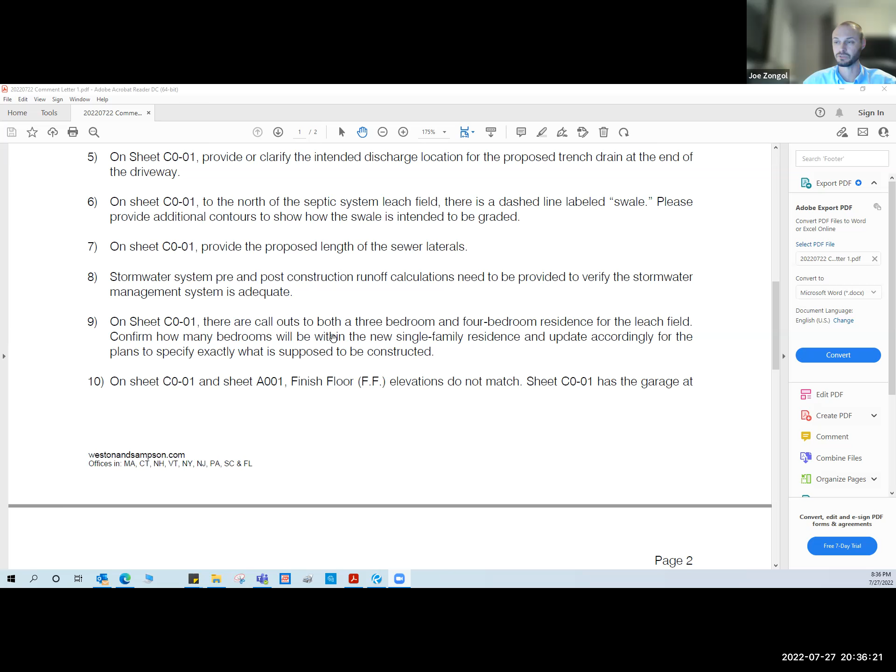There are callouts to both a 3 and 4 bedroom residence for the septic leach field, confirm how many bedrooms will be in the new family residence and update the plans accordingly. So we want to see the exact number of laterals specific to this house being constructed. I understand the site plan was developed decades ago and was sized to handle multiple sizes of houses. We'd like to know exactly what's being proposed in this instance, so we can confirm it's being constructed properly.

There was some conflicts with the finished floor elevations of the house between sheets, so we'd like to see that rectified. That's comment number 10.

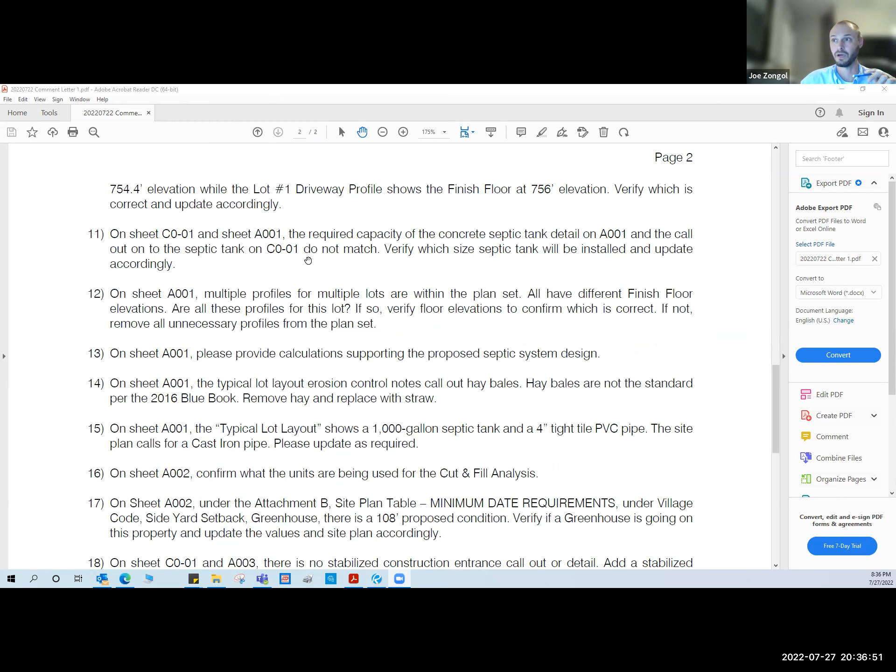Comment number 11, required capacity of the concrete septic tank on the detail wasn't consistent with the updated volume shown in the updated site plan, so it sounds like that was addressed. Mr. Machado mentioned there were multiple profiles for multiple lots on the detail sheet with different floor elevations. It sounds like that's been rectified, so when we get the revised drawings, we'll make sure that's been taken care of.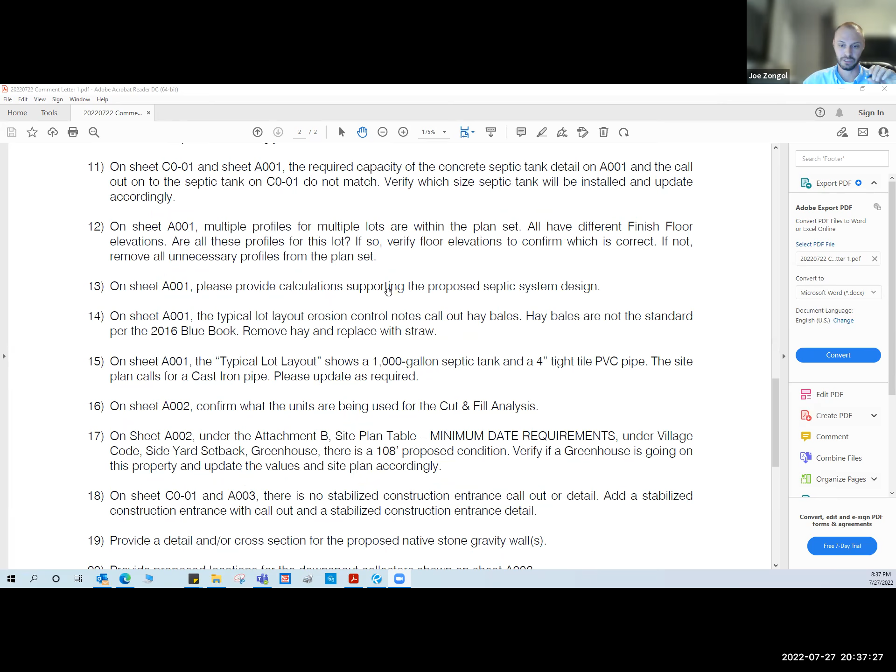Provide the supporting calculations for the septic system leach field design. Typical septic system submittals require calculations that determine the basal area, the required linear footage of the lateral, based on the percolation rates used in the field, and then the loading required for the house. We'd just like to see those calculations to verify the system sizing is correct and appropriate.

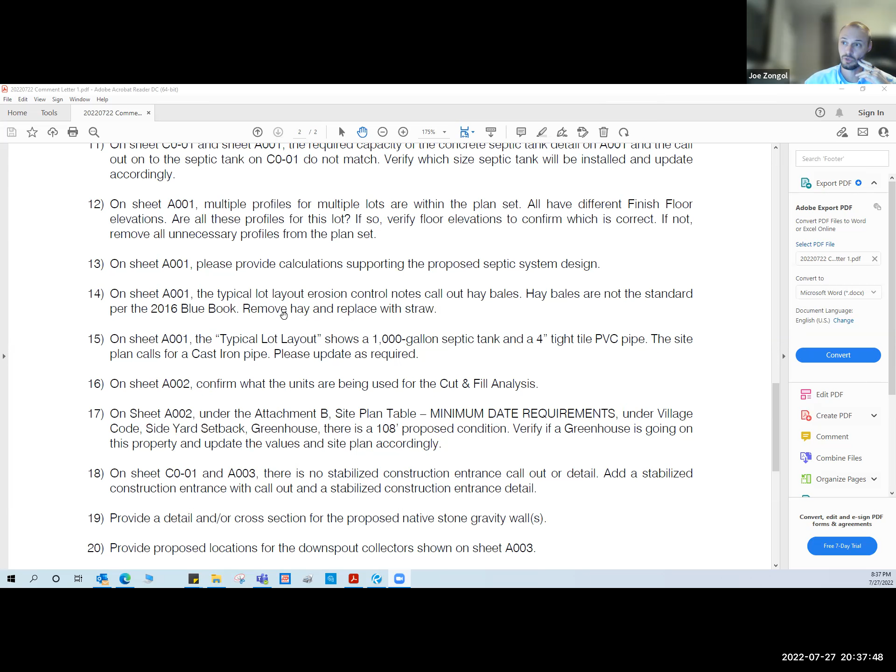Typical lot layout erosion control notes call out hay bales. Hay bales are not standard per the DEC stormwater erosion blue book, so remove hay and put in straw. The difference is hay bales have seeds, straw does not, so that could cause planting in the area, vegetation that's not wanted within the village.

Typical lot layout, now going to the detail sheet, the septic tank sizing wasn't consistent. Also the pipe material leading from the house to the septic tank and then from the septic tank to the leach field was inconsistent. You're showing cast iron pipe—I'm assuming if you want to use iron pipe, you'd want ductile iron pipe—but the detail shows PVC. PVC would be acceptable in this application as well.

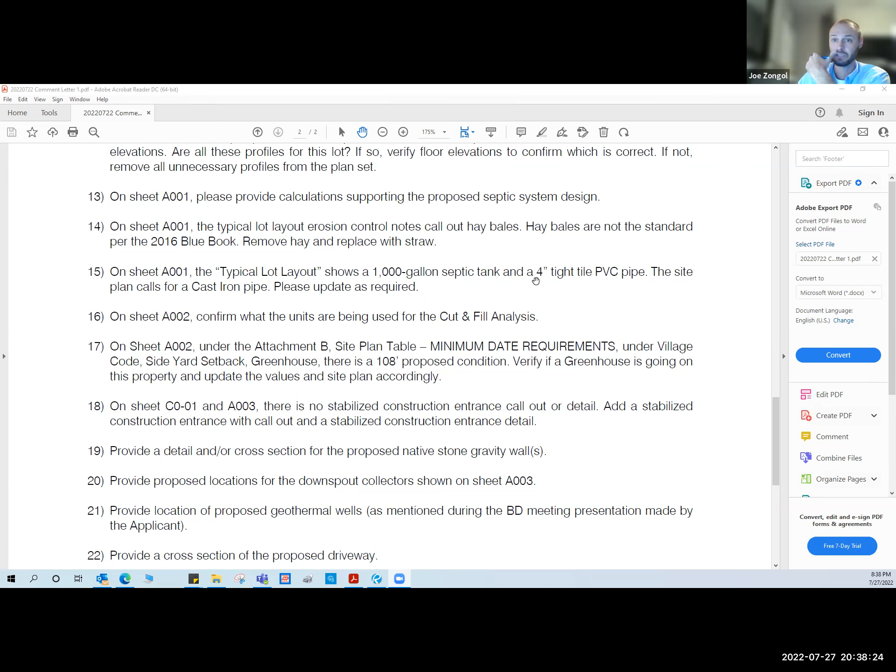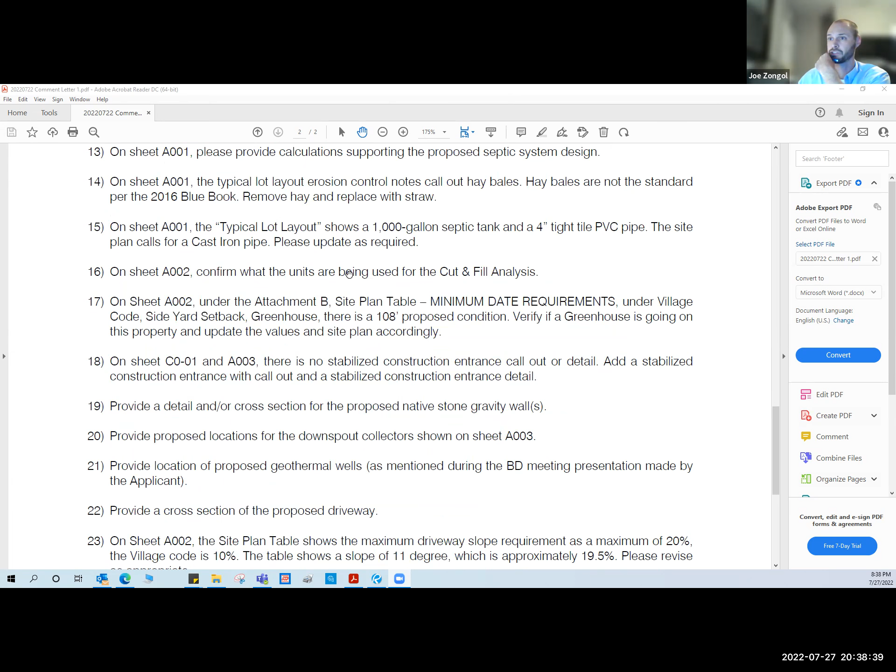The units being used in the cut and fill analysis weren't clear, and I'm seeing it says square cubic feet. I'm not familiar with that unit, so if you could just clarify, so it's understood by all, whether it's cubic feet or cubic yards—makes a big difference.

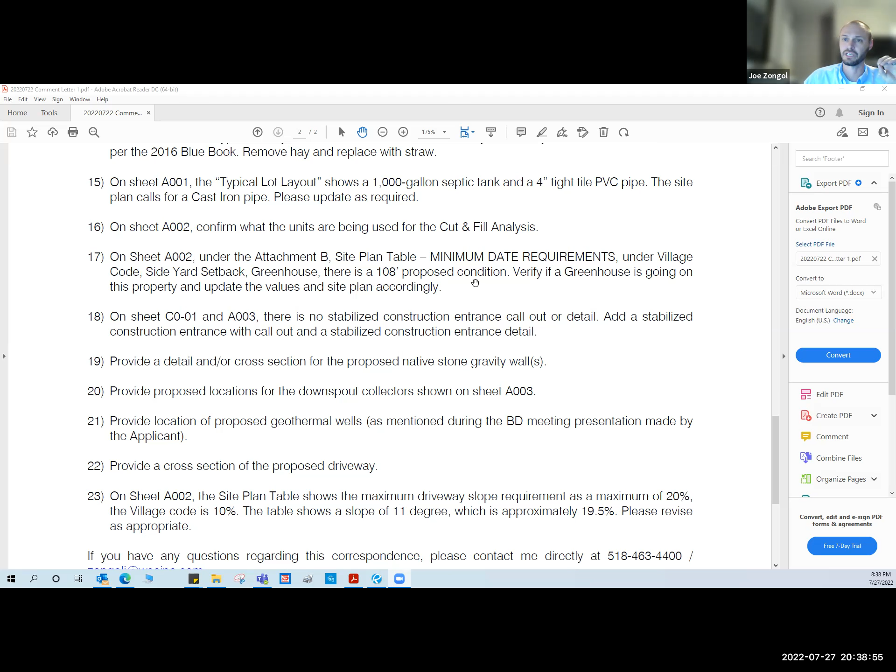Minimum setback requirements under village code, yard setbacks, greenhouse—it shows 108 feet for proposed condition for a greenhouse, but we don't see a greenhouse on the plan. I think I noticed on your revision that you're referring to the enclosure for the pool as a greenhouse. We'd just like to get that clarified, unless there is intended to be a greenhouse on the site.

We'd like to see a stabilized construction entrance called out in detail on the site. This is a typical erosion sediment control detail provided by the DEC—basically large aggregate stone, an anti-tracking pad essentially. So you're going to have equipment driving on and off the site, and we want to make sure the soil doesn't get tracked down through the village roads.

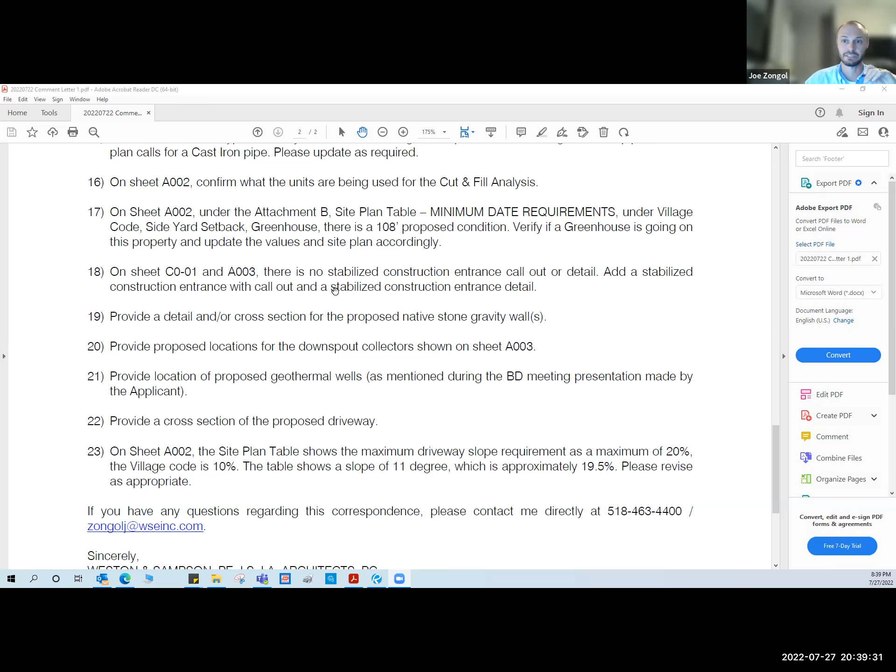We'd like to see a detailed cross section for the proposed stone walls. Along the driveway, there are multiple walls being shown, and one of them, I believe, is shown as being 15 feet tall. So we'd like to see how that's being proposed to be constructed.

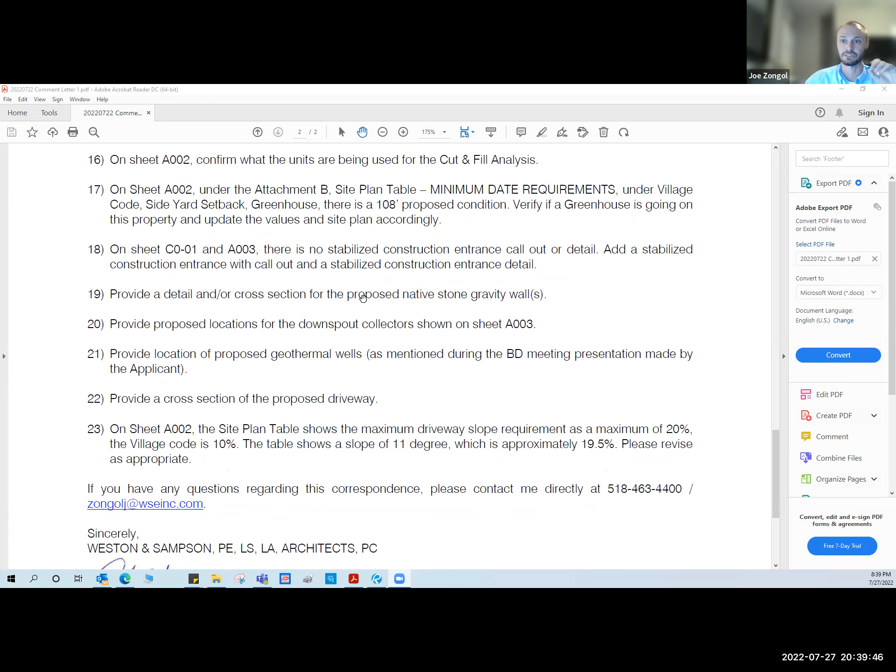Location for the downspout collectors on sheet A003—this was mentioned earlier in the meeting. I'd like to see on this updated plan the invert elevations for each of the downspouts and then the invert elevations at the connection point, because it looks like where a couple of the connections were shown in the back of the house, it was actually traveling uphill, so those would be rather deep. We'd like to understand how those are connected to make sure they flow properly.

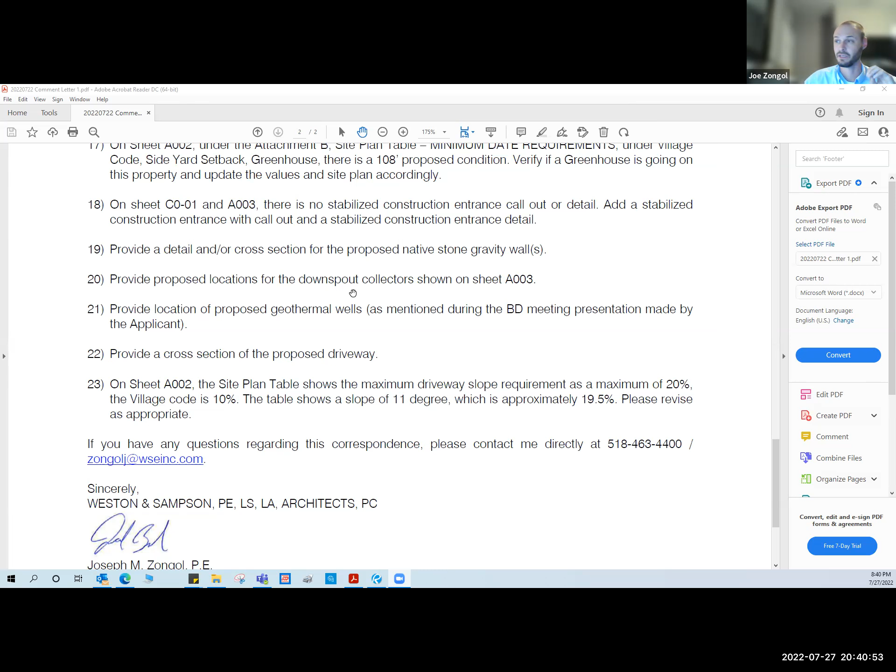If you're showing these collectors, we'd like to know where they would be, or in what instances they'd be used, since they've got a finite volume. If you've got a larger storm event, typically they have overflows, so if you're substituting the piped roof leaders for these collectors, I think the village would still like to know where they're going to be, because on larger storm events there will be a bypass and these will flood and flow overland. We want to make sure the stormwater system will be collecting it in the infiltration ponds as opposed to going downhill to another property.

We'd like to see the location of the geothermal wells. We discussed that earlier.

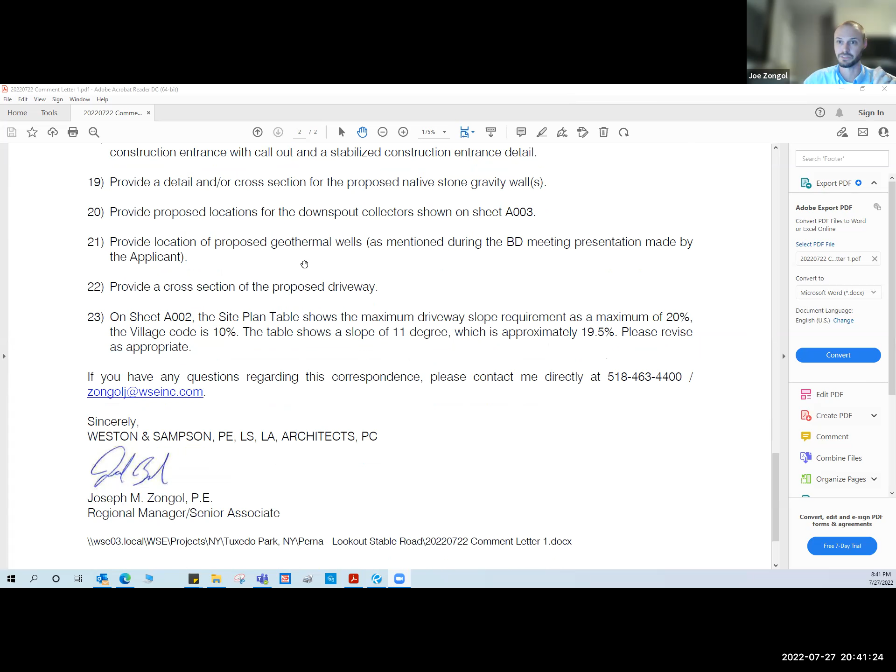The primary reason we'd like to see that from an infrastructure standpoint is to make sure there's proper separation distance. You have to be a certain distance away from stormwater infrastructure and primarily from sanitary wastewater infrastructure. Since it's a pressurized pipe, if it were to fail, you don't want it intermingled with wastewater effluent. Where you have it shown is clearly away from the septic field, and we want to make sure it's not moved close to the septic field.

We'd like to see a proposed cross-section of the driveway, meaning a cross-section of what the driveway material is going to look like. Is there an underlayment fabric, and is it 12 inches of stone, 6 inches of stone, what type of stone, to get an idea of the construction. We've also talked about the code requirements, so we'd like to see that clarified, not only for the driveway but for the other items mentioned. Those were the comments we had.

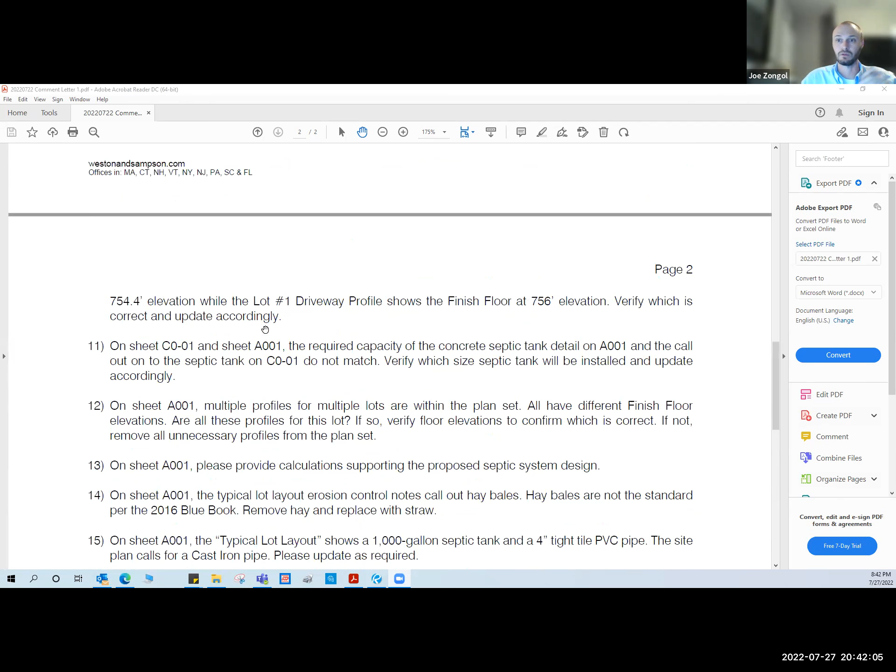I'll hand it back to see if there's any other questions, or if you'd like me to elaborate on any of the points I mentioned. So at this point, does the applicant have questions about what we just went through? Do any of the planning board members or John have additional questions? I don't.

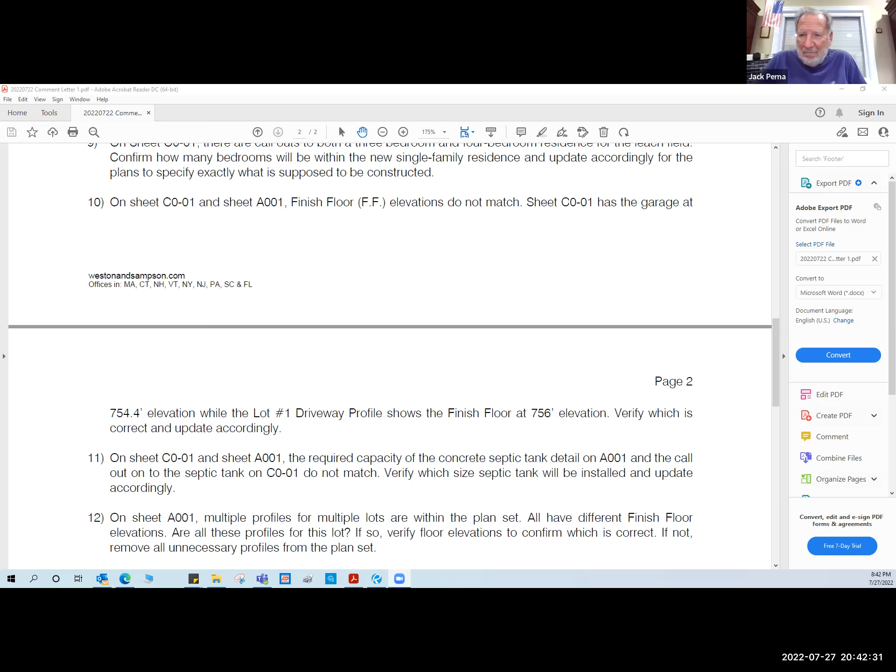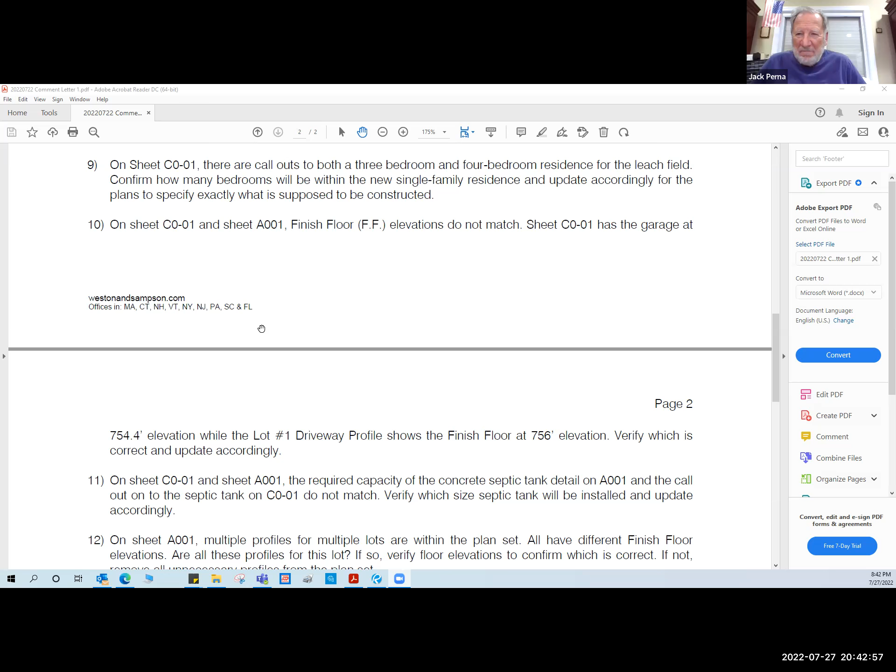I'm good. I have one question on the greenhouse. Since there's literally no greenhouse, there's no dimension — I could put a 0 there or not answer that question, correct? Correct, there's no greenhouse needed. If there's no greenhouse, just say no greenhouse. No greenhouse, there you go. But put it on the table.

Sounds good. I just have one question. This is John Ledwith — Ashley, should we wait until these questions are answered on a revised site plan before we send it to the county?

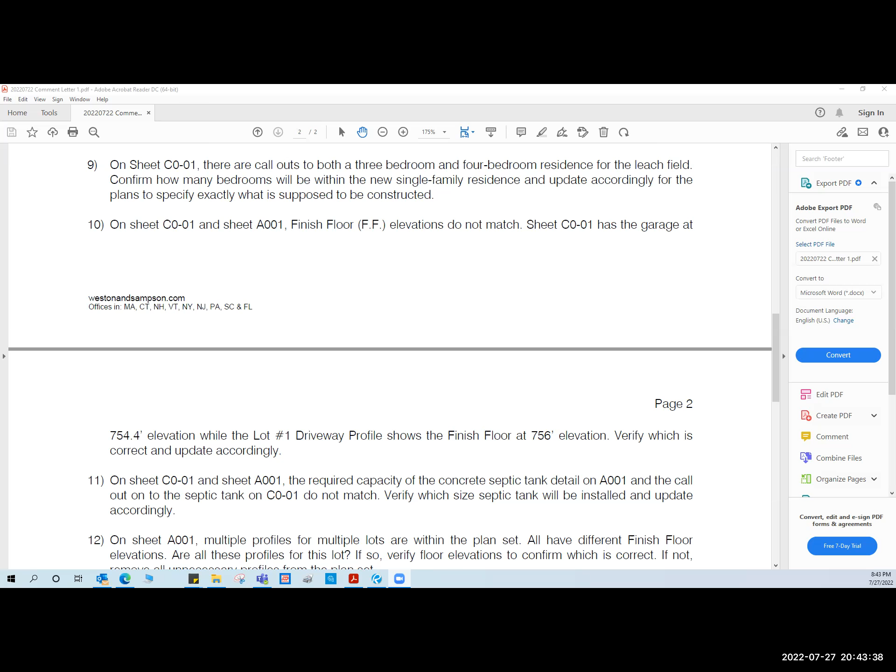I don't think you need to if you want to get that process started. They do have a 30-day period, at least, to review from whenever they receive it. If there are things you want to wait on, if they're going to be submitted sometime soon, you want to at least have a complete, most updated set with the correct revision date to send to the county, because I think there were some different drafts floating around. Yeah, and the questions we've raised about the site table need correcting before that goes to the county, and the revision date on the plan, so we're all on the same page.

So maybe you wait until there's a new submission — you could send it once there's a submission that sufficiently addresses those issues. Yeah, I think it's best that way.

Okay, any other questions or actions? One question I did have was about the email we were to review today regarding a neighbor concern. Is that addressed now, or is that just FYI information?

I apologize, I didn't see that one. John, did you send it out? Yes, I received it around 5 PM today, so I sent it out to the board. Oh, okay, it came in that late. To be honest, I'm not sure there's anything actionable there. Okay, yeah, that's what I was wondering, but I wanted to bring it up because I read it. I believe those comments have been shared with the applicant as well, correct? Correct. Great, perfect.